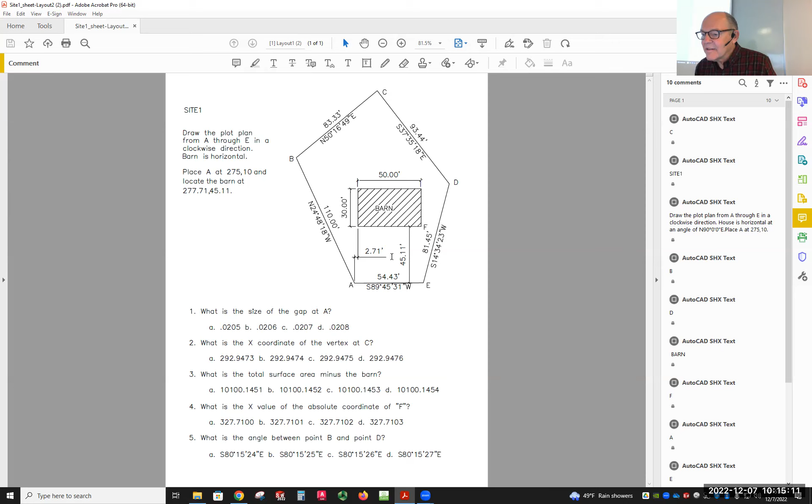One of the things you might not have realized looking at this, the barn right here, it's got a dimension from this edge. That means that that right there has to line up with this. So it's not horizontal. That makes sense?

So the way you would place that in there, what I would do is take that piece of the property line, offset it 45.11. That'll give you the bottom edge of the barn. Then starting at A, you're going to go over 2.71, and make sure you start at the beginning at A and not at the end of the whole thing, because there is a little gap there, right?

So if you start there and just go over, and in fact, you could draw a line from the end of that property line up and then offset at 2.71. That'll give you that corner right there. And now everything else has to be done.

Let me quickly do that one as a review, and then I'll show you how I would set that up for the barn. Okay, so let's start AutoCAD.

Right. Oh, I see, I see. You're talking about right here. Got it.

It doesn't, huh? Let me just see something here. Oh, it is off 10. That's a mistake. Boy, am I glad you found that. That's a 10. That's what was plus that. And that's up 10, yeah.

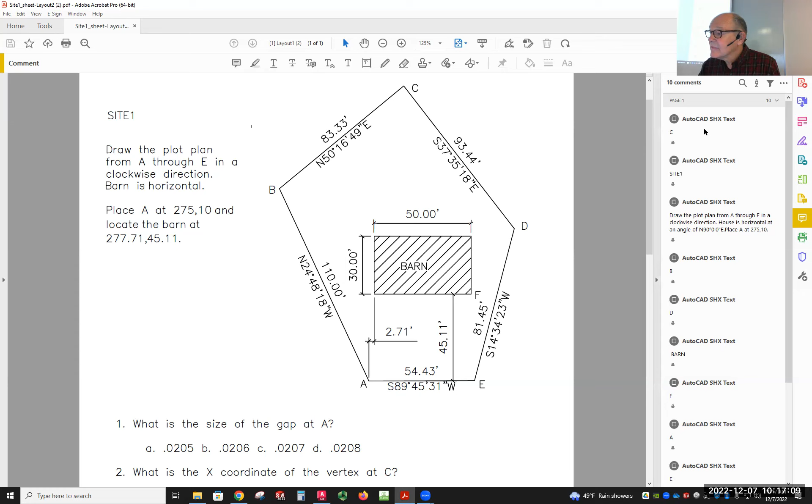You know what? I see what you're saying. And that is because there's an error here. That should be a 5, right? So anybody else doing this, Sarah just found an error here. If you take a look at this, that's 45.11 going up here, right? So it tells you to start it at 55.11 now, which is because that corner right there originally was at 10. All right.

What I actually would like to do on this one is really just get rid of that altogether, and then you just use the dimensions themselves to place it. So, but given that I said that, let me go on and do it that way. So what we're going to do here, I'm going to modify this, and I'll change that right now on the assignment.

And Jansen, would you close the door for me? Make sure that that's unlocked. If it isn't, I'll go and unlock it. I just find it a little distracting. Is it on the outside? Can you open it? Don't close it first. Hang on, folks. Actually, what I was expecting you to do was this, not lock yourself out. But we got you back in. I just want to make sure other people can come in. Here we go. Now people can get in, but I won't be as distracted.

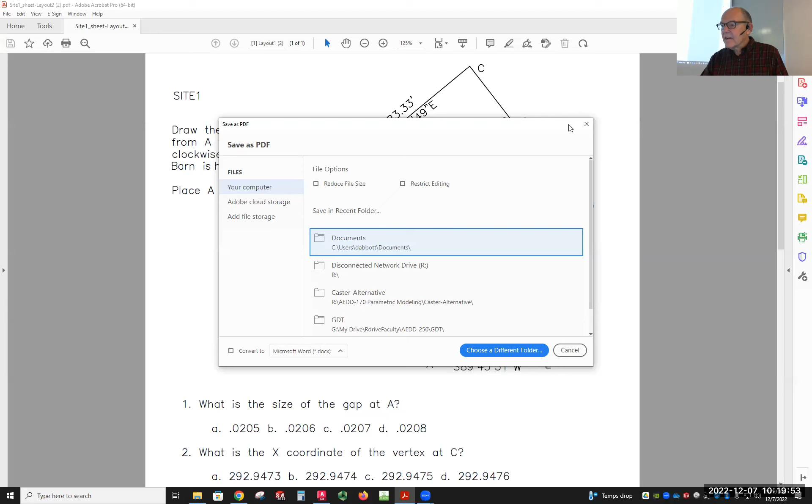All right, let me show you what I was talking about with this. And then we'll go through, if there are any other questions, I'll answer those, and then we'll go through the final exam. So I have AutoCAD here.

I'm going to start a new drawing, and this one's going to be acad.dwt. Come back out here, bring that over to there.

All right, so the first thing I'm going to do is to change my units. I'm going to change the units in AutoCAD so that they're going to be decimal, and I'll leave the precision set the way it is, but I need surveyor's units over here, and I want to set the precision to degrees, minutes, and seconds. So we do that.

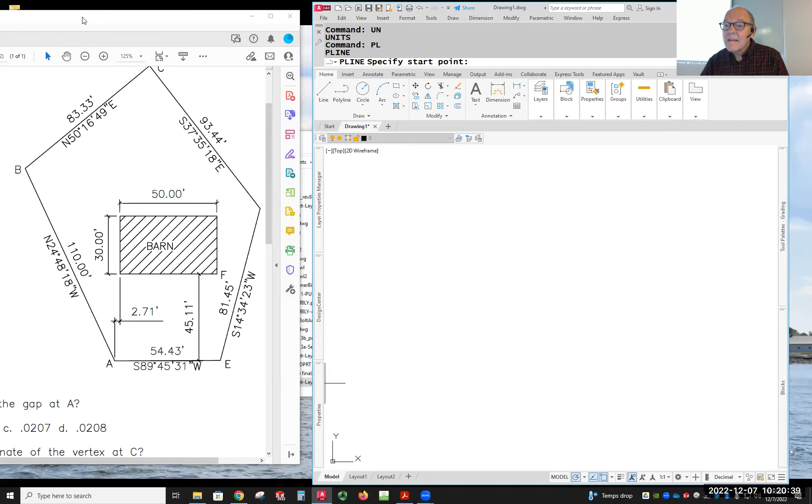Now I'll do my polyline, and it tells you to start that at 275 and 10. So when it asks for the starting point, I'm going to type in 275 and 10 like that. Zoom back out a little bit so I can see, because that's quite a ways away now.

I've got to zoom out before I start. All right, polyline, start point 275, 10. Here we go.

All right, so now if I look at the property line, I'm going to do this with relative coordinates, so the @ symbol, and then 110 at an angle of north, 24 degrees, 48 minutes, 18 seconds west.

Oh, I had a typing error here. I put the apostrophe instead, so I need to do it again. It's a good idea to take a look at what you just typed before you go on. So at north, 24 degrees, 48 minutes, and then 18, and 18 has to be seconds, so you need the quotation mark on that, and then W. Then it draws my line at the angle that I want.

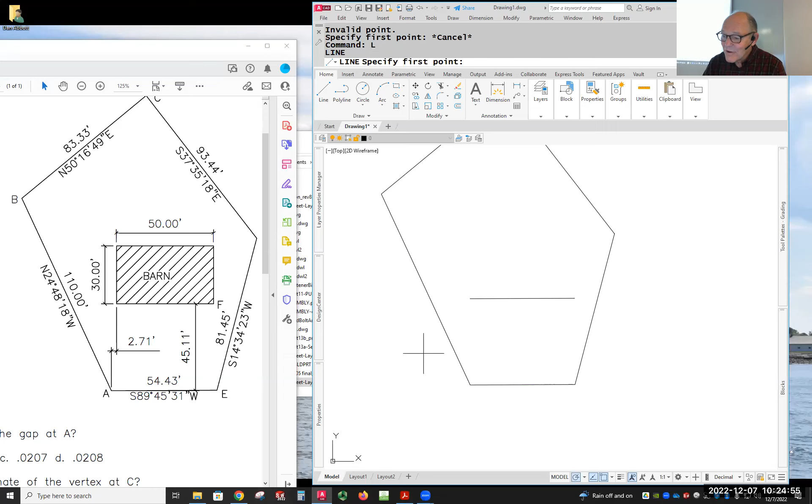Make sense? Now, before I said, if I draw a line from the end point of this - let me point something out here. I'm going to draw a line from the end point of that line. People tend to go right on the end point, but you notice there are two end points within that square, and I don't know which one I'm getting right now. So when you're drawing, if you want to be accurate, go to the endpoint by going to one side or the other of the midpoint of a line, because right now I have a running object snap for midpoint. If I'm closer to the midpoint than the endpoint, that's the one it finds. When I come down here, that's the endpoint - I don't have to be on it, I can see it's the endpoint because it's got that little square. So now I'm drawing from the end.

If I go straight up on this, now from there, I'm going to offset 2.71, and that's just going to give me the corner right there of the barn. So now I'll get rid of that. I'm going to use the fillet command to make a square corner here, so there's the corner right here.

Now everything else I'm going to do, I'm going to offset 30, make that go 30 up like this. Now that gives me the top of the barn and the side of the barn. I know that's the beginning of the barn right there. I'm going to draw a line that goes from here to here. Now the reason I'm doing this is I want to make sure that the angle between those two right there is 90 degrees. But because the line that I started with was not perfectly straight, it wasn't exactly 90 - that means it's not going to be exactly 90 if I use that original line. So by offsetting these two, I know those points line right up. When I connect the two endpoints, then that line is going to be 90 degrees to my starting line.

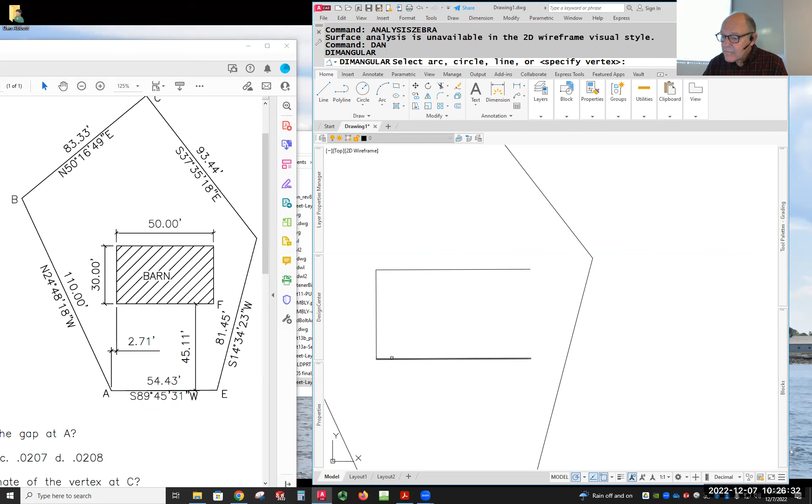And that's even if - when I put that angle on just to see what it looks like - even if I change the precision on that and put it up a little higher, right out to 8 decimal places, it's still 90 degrees. Now, I'm going to offset 50.

Oh, I put the foot mark in. Offset 50, and now all I have to do is clean the ends up here, and I can do that by trimming, or I can do that with a fillet command, as long as the radius is set to 0, and that's what it's set for by default. That's how I clean up corners all the time when I'm drawing using the fillet command. So when you're doing your job and you need a clean corner, that's the safest way to do it.

Because it'll extend lines or trim them automatically for you. Now, before that, if the last fillet I did was set to something like 10, I can't use the fillet command to make a sharp corner because it wants to round it, unless I hold down the shift key. If I hold shift down while filleting, it'll give me a sharp corner because people do it so much. It's a really useful tool. So that's how I would place that barn in there. That makes sense, Sarah? Okay.

And then you go ahead and answer the questions from there. Anything else on the auxiliary views or the site plan? Anybody in here? Anybody at home? Sarah?

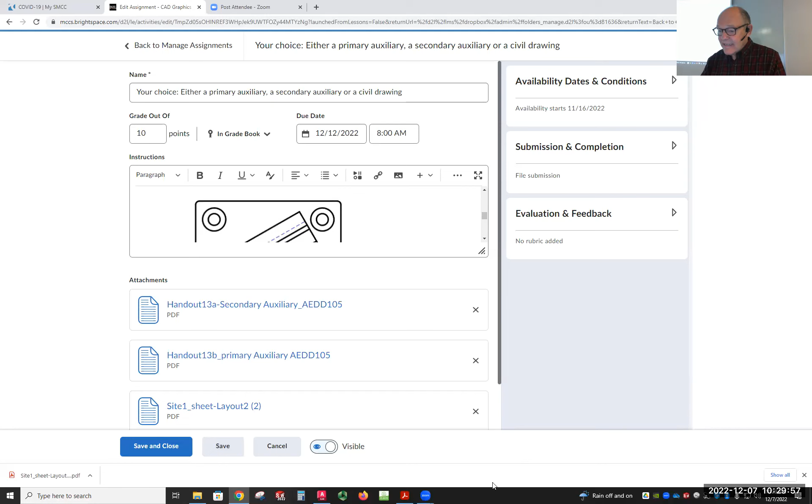But all right, let's go back and take a look then at the final exam. It's the final exam review sheet, I should say.

Oh, I know what I'm going to do. I'm going to open up the Microsoft Word version of this instead of the other one, so I can type inside it as we go through if you have any questions about it.

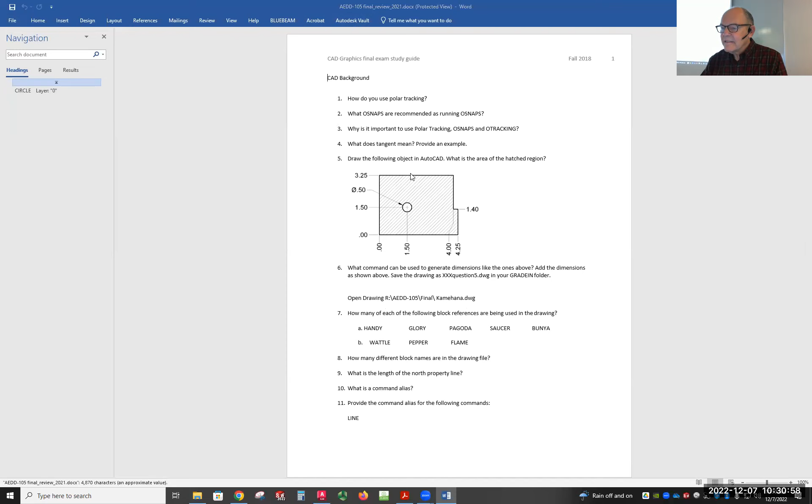By the way, if I give you something in the document file format, the DOC or the DOCX, that's a Microsoft Word file, but you can go to the window at the bottom and open something called WordPad, and WordPad will open a doc file. So I could have gone here and opened this. I'm going to just check and make sure that's still true.

So we're going to call it a DOC file right there. I'm using it already in something else. That's why it won't open, but it looks like it would. Let me just make sure. I want to make sure before I tell you that it will, that it does. So let me open it there.

Yeah, so you can see that's exactly the same file. So you don't need to own Microsoft Word. You don't have to have it installed on your computer. If you've got Windows, WordPad is an application that comes with Windows. And it doesn't support everything, so it's quite possible.

Yeah, you see, it does mess up a little bit here. You might have to go back and say, well, circle. Okay, that's what it's saying. Arc. Those are the commands. So WordPad will open it, but that doesn't mean it'll open it entirely accurately.

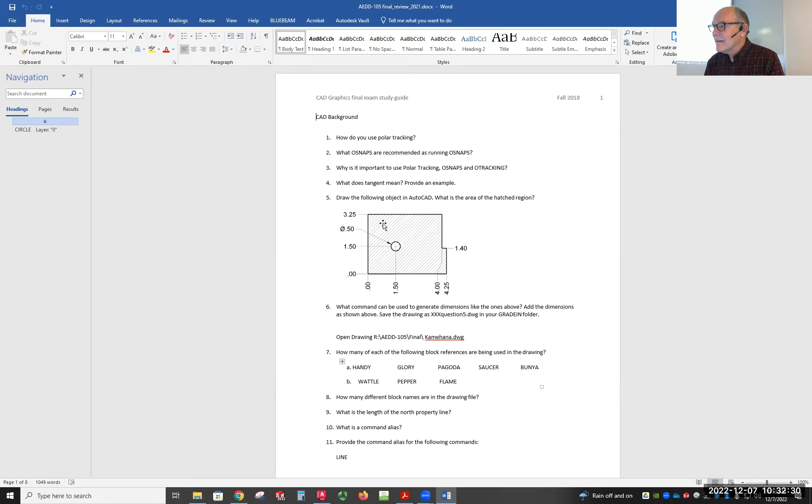So let's open this up with Word. But you have it in two forms. You got a PDF file and you also have a doc file. If you want with a PDF file, you can print it out and handwrite it, or if you have a way of typing into a PDF file, you can do it that way, or you can open up the other one. So the question you had was about the last drawing.

Was that this one right here? Okay, and what is your question?

Here's the thing about an auxiliary view. If you take a look at this part, and I show you what it looks like, this has an angled surface. There's a hole that is 90 degrees to that surface, meaning it goes straight down through at 90 degrees. The only place to show that hole in true shape is if you were looking straight down at the surface, right? So on this particular assignment...

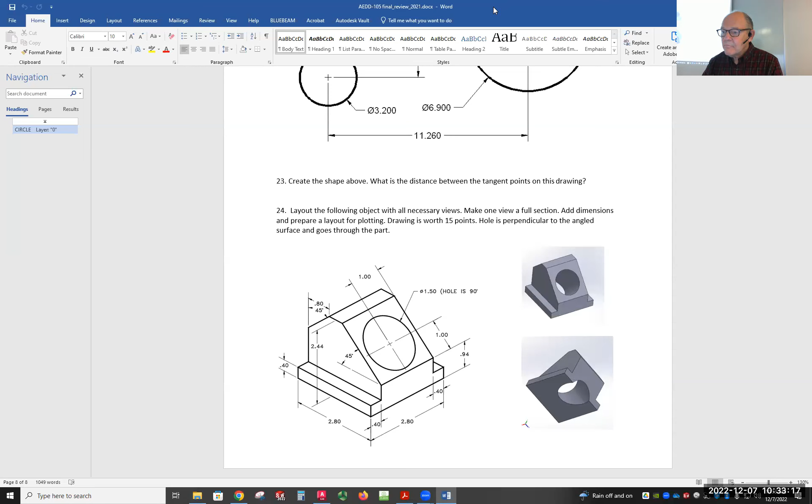All you've got to do is set this up. And really the offset command is your best friend when it comes to auxiliary views. No matter what the auxiliary view is, chances are really good you're going to be able to generate what you need using the offset command.

I'm going to start a new drawing. This drawing is in inches, so we'll do that. If I draw the front view, I just come over 2.8, and I would come up the height of this, which is 0.94. And then I'm going to have an angle, and the angle is 45 degrees. So I could go down and set my polar tracking so that it only goes 90 or 45. So there's my 45-degree angle.

I don't know what the actual length is, so I'm just going to draw it longer than it needs to be. Doesn't even matter. You can draw it shorter than it needs to be or longer, because the fillet command will clean it up for you when you're all done.

Now I'm going to go back to the beginning. I'm going to go straight up on that. If I go straight up on that, it goes up 2.4... 2.44. Now I'm going to come over.

So if I come over here like that, that's that corner right there. Make sense? Now, if I take a look at this, I also know that 0.8 over from there. So I'm going to hover over this, go to the left, go to the right and type in 0.8. From here, I go down at 45 degrees and I get that. So then I'm going to trim this all up.

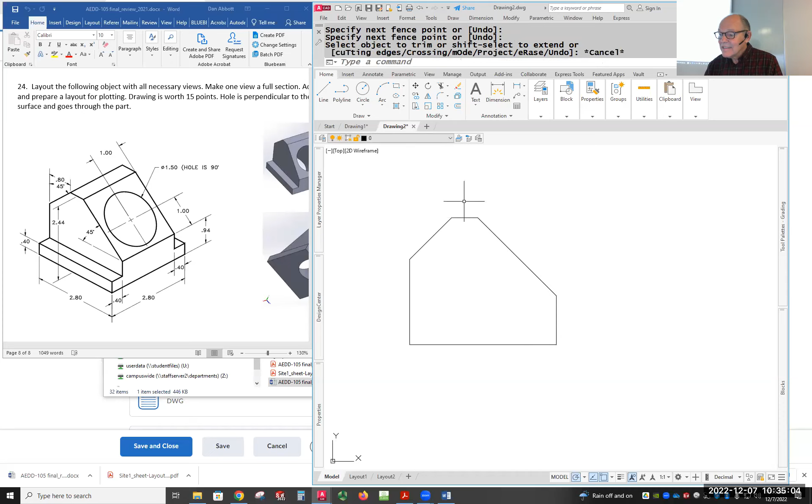Now it's that 45-degree angle that causes the necessity for an auxiliary view. So if I offset, I'm just going to offset this so that there's 2 inches in between. If I bring that up here like that, and then offset once again the width of this, and the width of this is 2. Bring that up like that. That is what it looks like if I'm up here looking straight down at that surface, 90 degrees to that surface. Make sense? Now I just have to go in and clean this up like this.

Now, where is that hole? That hole is centered. It's 1 inch above. So I'm going to offset 1 and bring that up. It's 1 inch above the bottom and happens to also be 1 inch over from here. So the center of the circle is going to go right there. The diameter is 1.5. That's my auxiliary view on that particular part.

Okay, if it has an arm coming down, so whatever you have for an angle, draw the line representing the angle and then offset it. That's a primary auxiliary view. There's no secondary on this one. You're going to have a different thing to draw, but I'm not going to give you a secondary auxiliary view. It would be a primary auxiliary view. All right, make sense? Everybody else make sense?

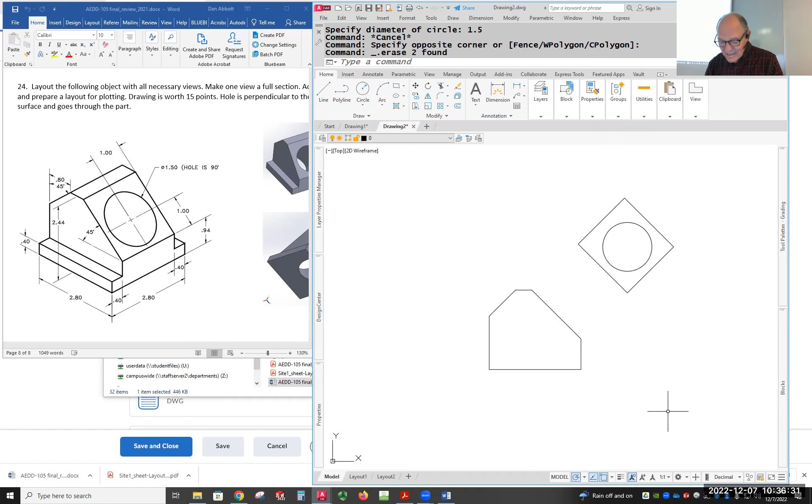This is really no different than doing a right side view or a left side view. You're still projecting, but normally if you're doing a right side view...

Hang on, I'm just going to put an arrow pointing at this. So the width of 0 to start off with, and the width to end would be like right here. Hang on just a minute. Width, starting with 0, ending with some other number other than 0. So there's my arrow.

So if you're looking from that point of view, which is how a right side view is set up, that's 90 degrees to that surface right there. So it's exactly the same thing, except that it's not a surface that is already orthographically in one of the 6 principal planes. Okay, make sense, folks? Yes? Ru, Thalia, make sense?

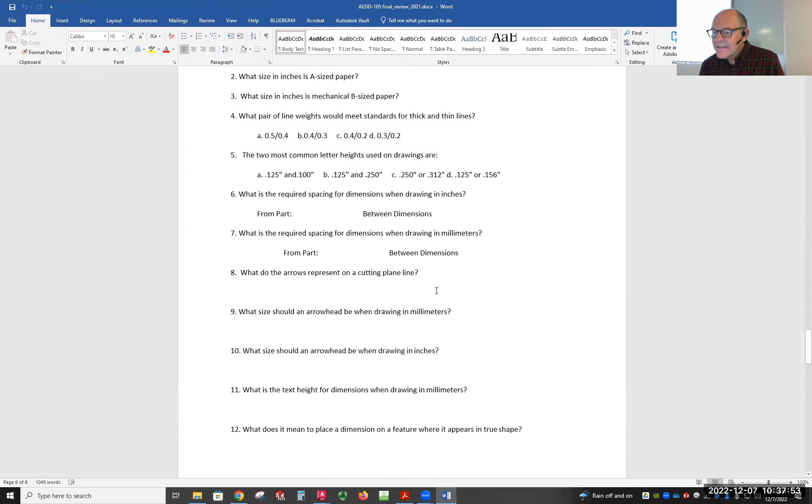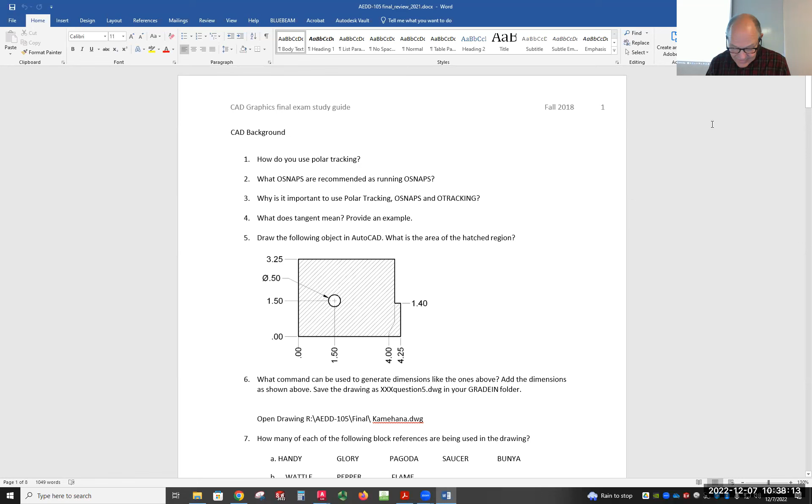Getting no response, I'll assume it makes sense. Now let's go back to the exam. Ernest had a question about the M-line command. Let me find it with Control-F, searching M-line. There it is, question 34: if you use the M-line to draw a floor plan, what setting controls the distance between the M-lines?

There may be questions on this exam about commands I've never covered. I think that's perfectly legitimate. Your job is to say, I don't know, and try it out. Any question that asks about something you're not sure of, whether you've been exposed to it or not, try it, take a look, see what it does. Don't just assume you know the answer. But since Ernest asked, let's talk about the M-line command.

I'm going to start a new file using ACAD, and let's say I wanted to do a floor plan. I'll go to units and set them to architectural, and make the limits big enough for a house, 40 feet by 30 feet. Now I want to draw something like a foundation, so I'm going to go to the M-line command.

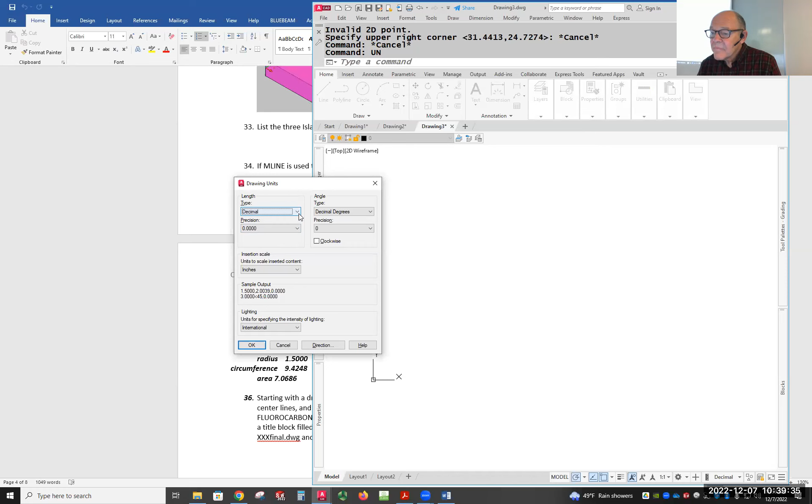Invalid point - oh, I picked architecture but never picked OK. I got a little ahead of myself. Now I'm changing my limits just so they're bigger than they start off being. I'll go to 40 feet and 30 feet, then do a zoom all.

Now I'm going to use the M-line command, starting at some random place. As I draw, I'm getting 2 lines. If you look at the options, I've got style, scale, justification - those are my 3 options. Justification is currently set to top, meaning as I draw, the top line is where I'm selecting my points. If I change justification to 0, I'm going in the middle between the 2 lines. If I go back and say bottom, now I'm using the bottom as my insertion point.

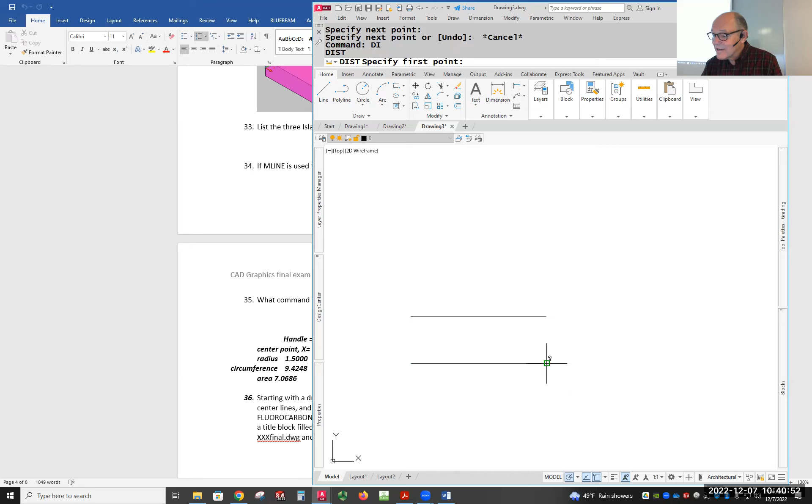Now if I go in here and say scale - this is how I would check this out if I were you - if I change that to 2, now it's twice as wide. If I put it in there and do a distance measurement from here to here, the distance is 2 inches. So by default, 1 means 1 unit.

Now let's go back and see the next one, and that's style. If I pick style, it says you don't have any choices, because if you take the question mark - whenever you get a command with a question mark, it gives you a list of possible answers - if I do that, there's only one style called standard. That should tell you that like dimension styles or text styles or table styles, there's something called an M-line style, but I don't have any idea how to do that.

I'm just going to start typing M-line and see if M-line style comes up. Doesn't seem to come up. How about M style? That doesn't seem to come up either. So where is the M-line style command? How do I change it? I don't know. What are you going to do? You know what you're going to do.

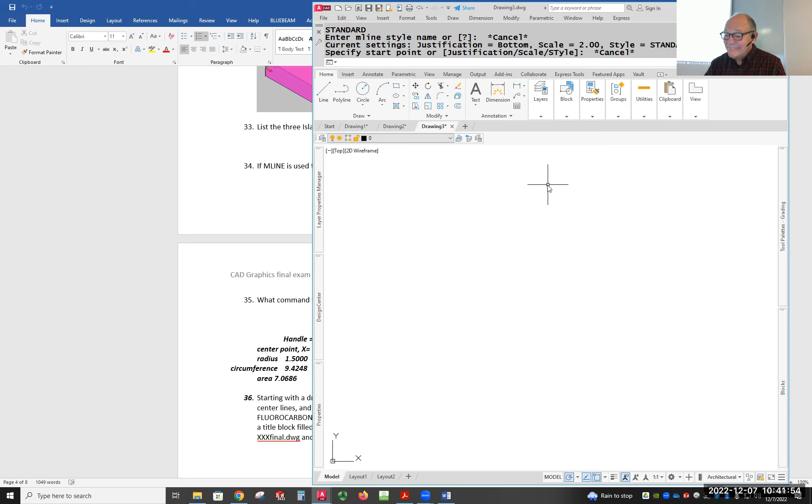You're going to Google it. You'll go out and search something like M-line style AutoCAD. And it comes up - search for M-line style, to create an M-line style, right there you pick it, and it says at the command prompt enter ML style. This all making sense? This is just a strategy for dealing with stuff that's new. On the job, when something comes up that you don't know, don't run and ask somebody immediately - try to figure it out.

Autodesk is the name of the company that produces or manufactures AutoCAD. The original company produced one product, AutoCAD. Now they produce hundreds of products. Revit is an Autodesk product, and so is Navisworks, which I'm going to be using on Friday. I'm doing some training at Bath Iron Works on Friday morning, and that's one of the things I'm going to show them. They have a program called Recap, where you take photographs, upload them, and it supposedly makes a 3D model.

Autodesk has a Civil 3D program, and they've got mechanical design software too. So they have dozens of different software programs. When you went and signed up to download AutoCAD, you went to the Autodesk website. When you get there, it shows you the various pieces of software that Autodesk sells, and that's what they are right there. As a student, you can download any of those.

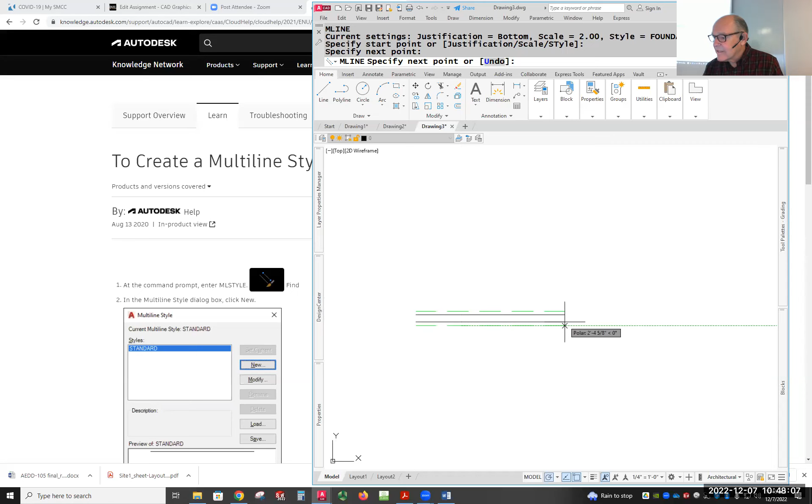Now, if we take a look at this, right now it's set up so it runs along the bottom. When I go to M-line, I'm going to say I want the scale to be 10 — a 10-inch foundation wall. And the justification — unfortunately you only have 3 choices: top, bottom, or 0 — so I'm going to go to bottom. That'll give me the outside of the foundation wall. So you see, I can go like this, let's go 40 feet. Zoom out and go up.

And you see what it's doing is making all the corners for me. And then I could go up 30 feet, and go over here another 40 feet, and then I could close it up. So it gives me a way of drawing and having all the corners cleaned up at the same time.

This might actually be very useful to you in that job you're about to do. I don't use it very often — to me, it's easy to just draw a rectangle, put it on the right layer and do it that way. But that's how the M-line command works.

Don't be hesitant to just try something and then look it over. The only thing you might run into is, I don't know how to change the style. You type something that makes sense, like M-line style — it doesn't work. You go and do a search online, a Google search. There's also a help system here, and that used to be very helpful, but the Google search is a lot quicker than going to the help system.

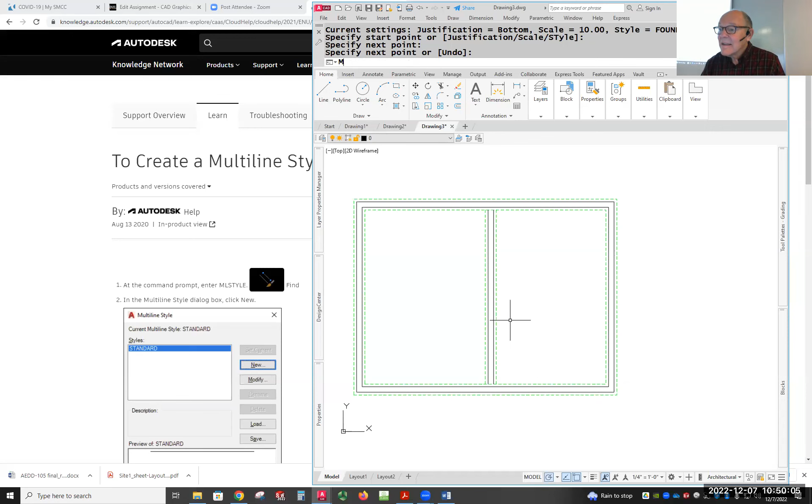The other thing is M-line has some other things going on as well, where you can say I want to snap to here and go here. And then you go to ML edit. ML edit allows you to say I want this to be an open T between here and here, and when you do that, it does a break like that — see what it just did? Now I can do an open T, then pick this one and this one. Now, what it should have done is taken and done a break right there, but it doesn't — it just does the outside.

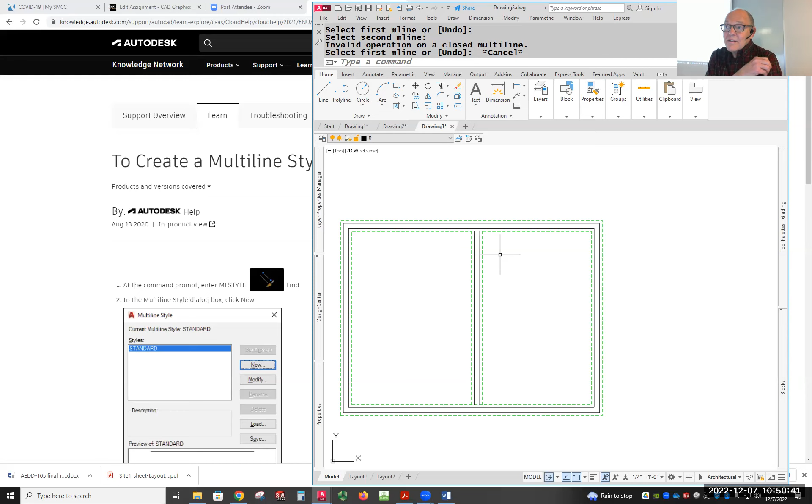These are when I'm saying there's limitations to this. To me, this has never been all that useful a command because normally I can do something else. But here's one place where it would be useful: suppose you had a wiring diagram, like 16 wires that all had to go together, and that sometimes happens when you're doing the kind of stuff you're doing. If I had an M-line style and made a new style, I'm just going to call this 16, continue. Now let me start with standard.

If I say I want to add another line, and I want that one to be offset 1, then add another line offset 1.5, add another offset 2, add another offset 2.5, do another one offset 3. Now I go in the other direction, add another one and offset that one -1.

I think you see where I'm headed with this — that's why I don't need to do all 16. But now the beauty of this is a lot of times you have these wiring diagrams. You can still see it up there — I can't see it here. Something changed. I'm going to have to look at the overhead on this one now. This is a black screen to me. All kinds of problems today.

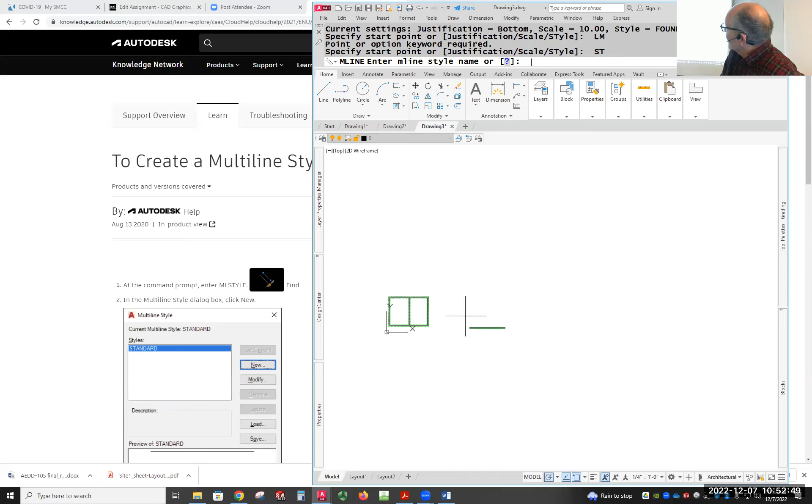If I go into the M-line command now and I look for style, which is ST... Actually, can you still see when I'm sharing my screen? Can you still see it? Yes? No?

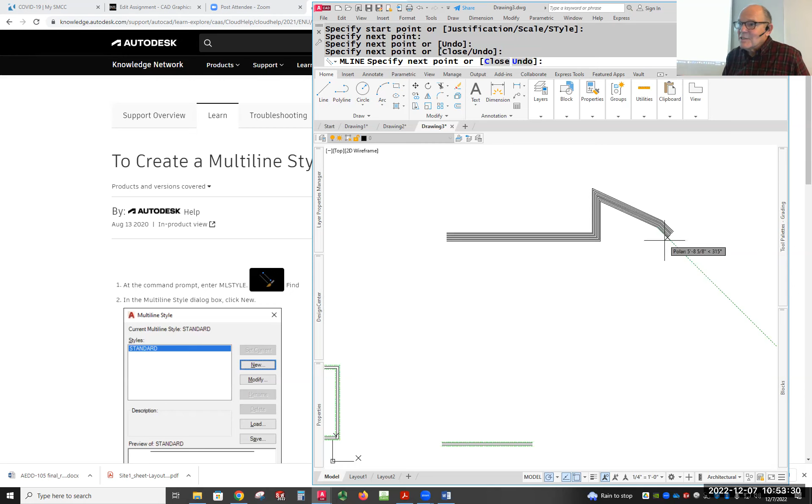Okay, the style I made is called 16. So now as I start drawing, as you can probably imagine, I'm getting as many lines as I created here. But you see what it does — it does all the trimming for me and cleans up the corners, no matter what they are. So there are situations where you have multiple parallel lines you need to draw and you know the spacing between them — this actually can become a useful command then.

Came back. All right, and this now becomes a useful command.

You can explode it and it becomes individual lines. So when you need a bunch of lines like this, rather than draw one line and go through the process of fixing it, it's sometimes a lot quicker to do this.

I will say though, if you draw with a polyline and draw the whole path, whatever it is you want to draw, the offset command allows you to offset that whole polyline. So you could create your own by doing that with a specific offset. That would be something similar.

And up here, once you explode that and it becomes a bunch of little individual lines, you can join them all together.

Ernest, you're joining my Zoom session, right?

So that's as much as I think you need to know about an M line, but that's how I would go about it. As far as a strategy, folks, don't underestimate what you know. You know a lot already. Otherwise, Barth wouldn't be getting a job, right?

All right, let's go back and look at the rest of it. Is there anything else on the final exam review, folks, that anybody has a question about?

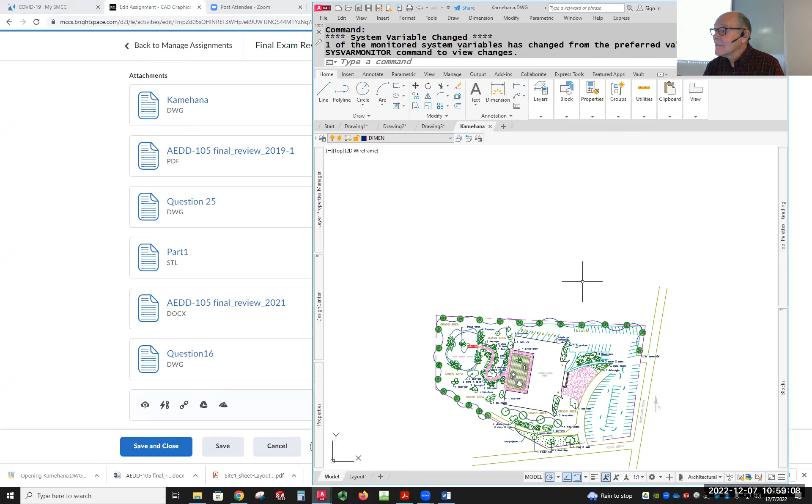Okay, that's this drawing right here. So I'll download it and open it up, and it looks like this. This drawing is a landscape drawing, and the landscape drawing has a piece of property. There's a property line right there going all the way around.

It's got a lot of blocks, because if I go and hover over any of these, you can see every one of these things is a block, because it has that little thing in the middle, and the whole thing can be moved. Also, if I hover over something and wait, it pops up and tells me it's a block reference, and it even tells me the name of it. So I could try to pick each one and figure it out, but that wouldn't make much sense because it would take forever and you'd miss something.

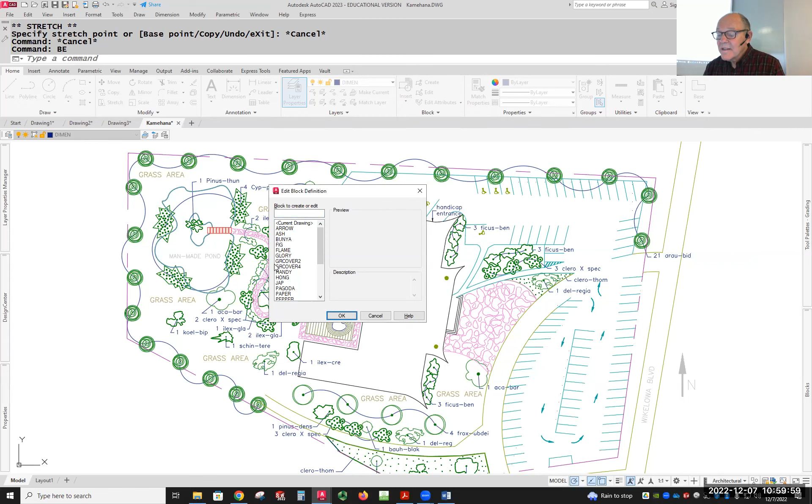If I go into the block edit command, it's a list of every block in the drawing. Doesn't tell me how many have been inserted though, does it? So there are a couple ways to do that. One is to say, well, what is the specific block name they want to know? So how many handy blocks are there?

If I go back to the drawing and go into properties, up here in the upper right-hand corner there's something called quick select. I go in here and say I want to select from the entire drawing all of the block references whose name equals handy. Go back to properties. There are 11 of them. Make sense? Let me do it again.

I go back over here and say I want a new selection set, block references whose name equals arrow. Pick OK, go back over here, and none of them have been inserted, 0.

Go back over here, try another one from the entire drawing. It says object type, go here to block reference, then down here based on the name. So if I pick something else, like bunya, probably has some. Pick OK, and by the way it lights them up too, but you don't have to count them. Just go back over to properties. It's going to tell you it picked 21 of them.

Make sense? There is also, and this is kind of a secret, a command called bcount. Bcount says press enter to select all. I press all right now, and then press F2 to see. It's going to give me a listing of every block in the drawing and how many of them were inserted.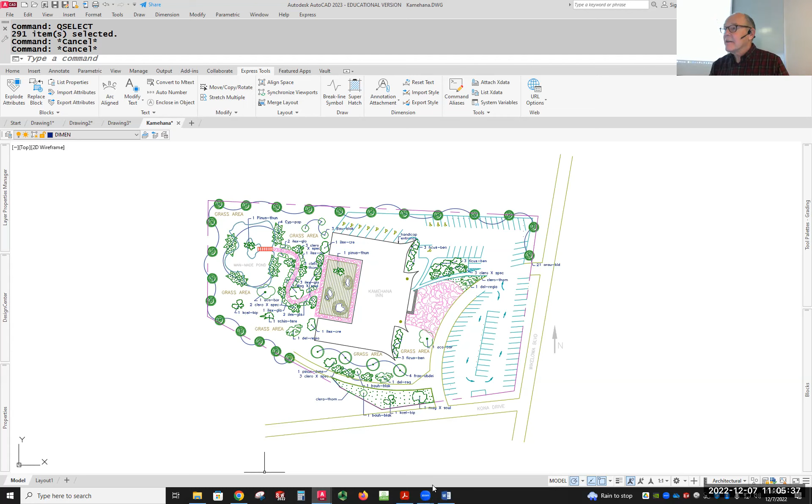And I'm going to see if I can communicate. Thalia and Rue, are you able to hear me and see me and everything is working out, or am I frozen here? Yes, everything's working well. Was the screen sharing frozen to you at some point? Yeah, but I think it was just the connection. I had Ernest in the class signed in as well, but he's in the classroom and he told me, listen, I can't see what's going on because it's frozen on my computer. So that's when I got out and got back in again. I don't know when that kind of thing happens when I'm working here, it just looks fine to me. So if something doesn't seem right, don't hesitate to interrupt me and say, I can't see what you're doing, or your screen is not moving, it's frozen, I can't tell what you're doing.

Make sense? Yes. And Thalia, I can understand why you are muted, apparently you have a little person with you who is requiring some attention. That I appreciate. Okay, we'll see you in a few minutes.

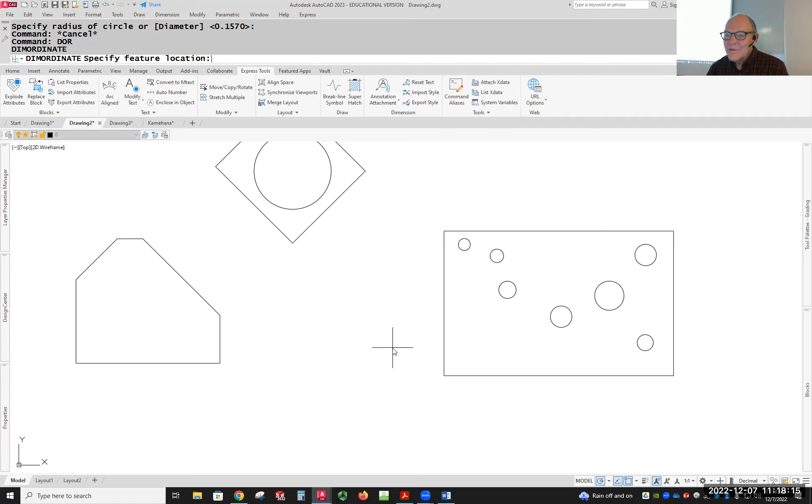It's very common to do something called ordinate dimensioning. Ordinate dimensioning can be placed with the dim ordinate command. When you do the dim ordinate command, you pick something and it's always based on 0,0 - that's how far away it is from 0,0. So it works only if you then change the coordinate system, the origin of the coordinate system, and make the origin there.

Now, if I say I want a dim ordinate, pick here and pull it out, now that's 0. Once that's 0, then I bring this out and that tells me how far in the y-axis that hole is from the base point. So ordinate dimensions are dimensions done from a datum point - every one of those numbers indicates how far away from 0 it is. So that would be the vertical, the horizontal dimensions, like so.

So you could do it like that and then go through, and those are called ordinate dimensions.

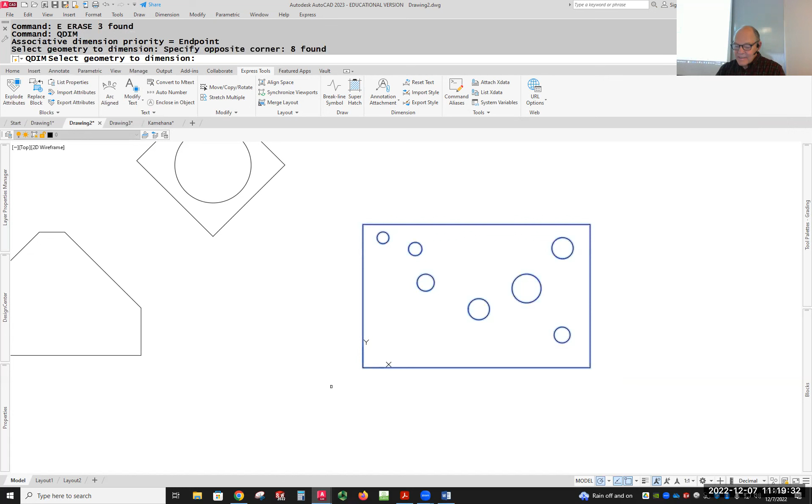Make sense? However, I'm going to show you a very nice tool because there is a command called QDim, which stands for quick dimension. QDim allows me to say I want a dimension of all of those things, I want the dimensioning to be ordinate, and I want my datum point to be right here. Now I do that.

Make sense? Ordinate dimensioning, and you can see what it is. Now when you have a situation like this where one of them seems to be on top of the other, you just pick it, drag it down, and you get something called the dog leg. This is a really nice way to put in dimensions, and again, it's called ordinate dimensioning.

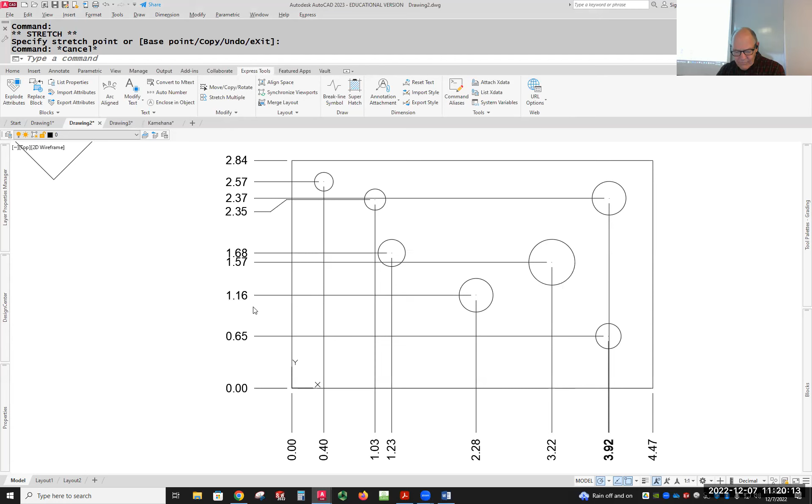So if you have a question on the exam that asks you to identify what kind of dimensions those are, they're the ordinate dimensions. The word ordinate is the root word of coordinate, and it means the coordinates X and Y, and Z can be added as well.

So the X coordinate is across the bottom and the Y coordinate is up and down, vertical. Make sense? And if you're asked to open something and put the dimensions on, QDim is a really cool way to do it. Let me point out, I go back to the QDim command now. Whenever you do something like this, if you do QDim and pick all of these and bring it over here, you notice that's not 0 right now because 0, 0 is over here. So if I were using my regular coordinate system before placing them, you have to do this: QDim, you pick your geometry.

Up here, you pick the type of dimensioning you want. You could pick continuous, for instance. If you pick continuous, it's going to line them right up like that. You could also take those dimensions and change them to ordinate, so now they look like that. So continuous is one, ordinate's another, and the other possibility is to do baseline. And to do baseline, that looks like that. Make sense? You see how quick that is.

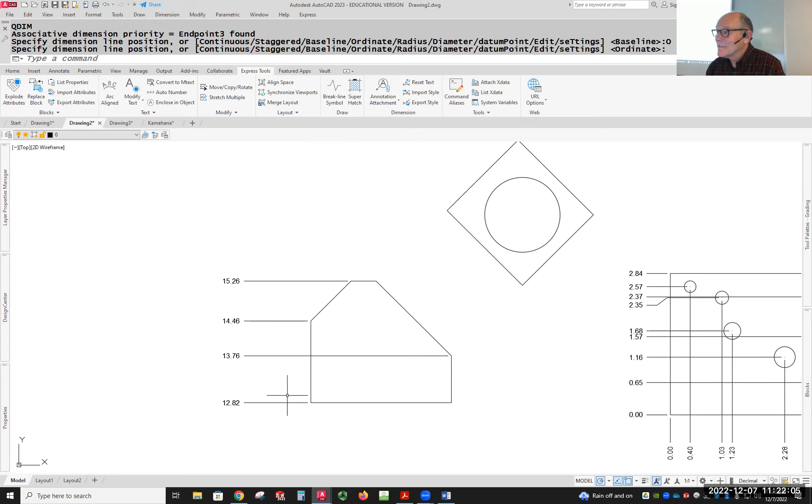Now the problem with ordinate, though, is that right now it's not starting at 0, 0. It's starting at how far it is away from the origin of the drawing. So when you do something like this, you've got to start with QDim by getting your geometry. And once you've got the geometry, you have to pick the datum point and say, there's where 0 is going to be. Now it's going to establish the datum as 0 in that corner that I picked, and everything else is going to come off of that.

Press enter, P for previous, come down here. Now 0 is the starting point, and those dimensions are the distance away from the starting point. Make sense?

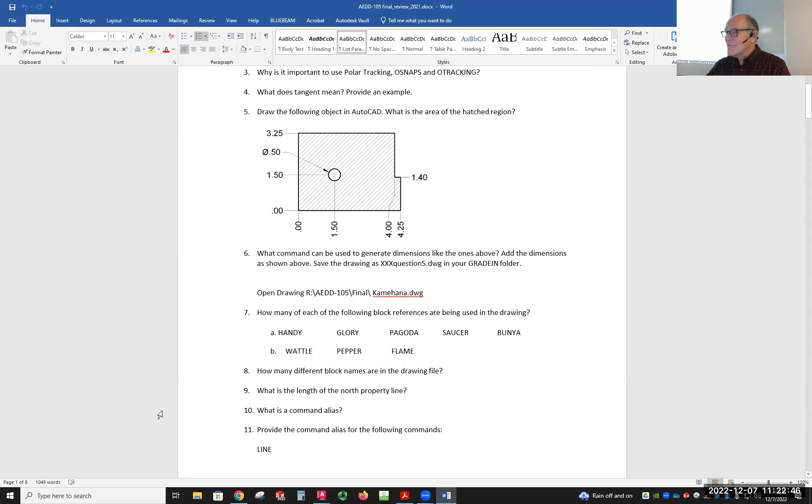This is the purpose of a final exam, by the way, to kind of review things, little new information, and to some extent see what you've already done. So we've talked about this. How many different block names? What's the length of the property line? You all know how to get distances.

So the property line in this case is that line right there. There's so many ways to do this. One is you pick it, you go to properties, and under properties it tells you the length right there. The other thing you can do is pick something, right click and go to quick properties, and quick properties list a number of things, including the length, right?

The other thing you can do is the dist command, and the dist command between that point and this point is going to tell you the same thing, but you have to be careful because it gives you distances in 3 different ways: the direct distance between the 2 points, then the distance in the X, and the distance in the Y. So the distance in the X and the Y is like, what's the distance straight across here? I'm trying to do this without getting a hold of the wrong thing. Yeah, there's the X, there's the Y.

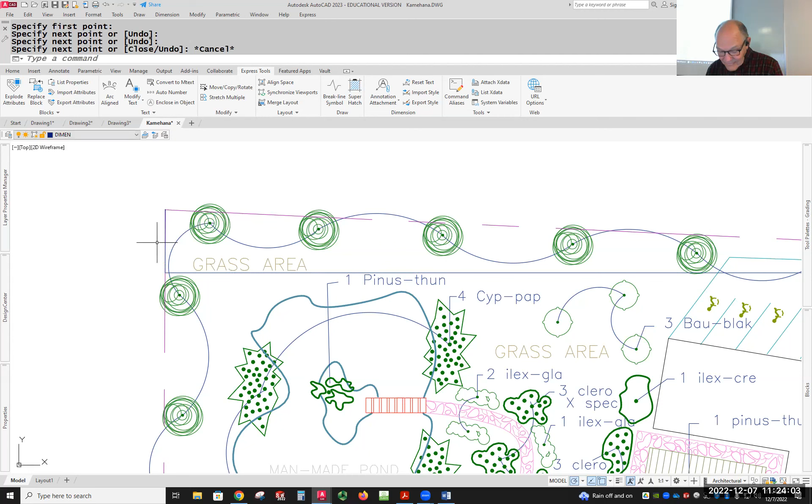So the distance in the XY, that's the X delta distance, and that's the Y delta distance. In other words, how far does it move in the X direction and how far does it move in the Y direction? And when you use the dist command, just be careful.

Just be careful that you don't read the wrong number here. Delta X means change in. The word delta means change. If you ever took a science class, that little triangle is a delta symbol. So a lot of times in chemistry, delta T means change in temperature, delta S means change in speed.

So the direct distance is given here, and then the angle here is given. And right now, because this is set up with surveyor's units, the angle is north 87 degrees, 16 minutes, 19 seconds west. So it's almost 90, or close to 90, but it's off by almost 3 degrees. Making sense? Go through the rest of this, I think this is helpful.

Say what? Yes, it is, if there's no north arrow. Yeah, there's a north arrow right there. The north side of this would be that line right there. In other words, if you take a look at this, north, based on you, north, east, west, and south. So if you looked at that, you'd be a little hard pressed to identify that long angled line as north, south, east, or west, because it doesn't really line up with any of them. But if you ask me for the north border, I would consider it the one closest to being horizontal. That would be the east, that would be the west, and the top one would be the north. Okay.

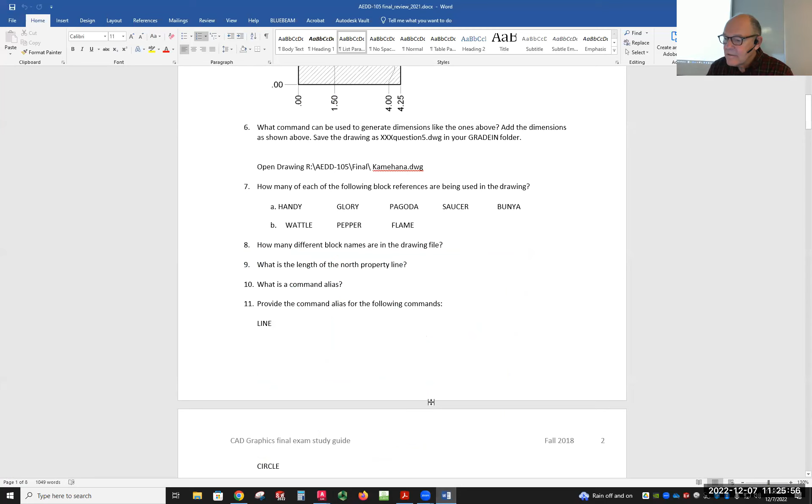You know what an alias is, correct? And I'm giving you a bunch of things saying, what are the alias? Now, here's the thing. What if you don't know what the alias is for one of those? Then you have to Google it, or just try it out, right? Here's the thing in AutoCAD that I hope you've learned. If I say, well, what is the alias for area? Type the letter A and see what comes up. I don't see area there. Well, AR maybe area, so then type AR and see what comes up. Oh look, there's area, right? You pick it, area comes up like that.

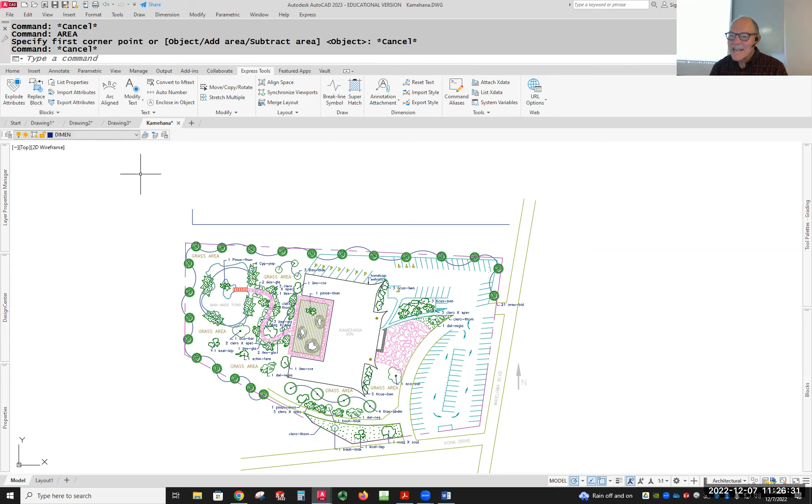Now, is there an alias for area? Try some things - AA is the alias for area. Okay, now you try something, you can't figure it out, you Google it. What's the alias? You just go to Google. What is the alias for area? And you're going to do this on your own. The other thing you can use is anything that you've already done for this class. And even if we did that in class, that's exactly what I would tell you. You have access to all the work you've done in class.

So if you're going, gee, he wants me to set this drawing up with layers - I've already set up layers. Oh, I think I'll use Design Center and I'll bring my layers in. That's what I love seeing students do, because then you're working the way you'd work in the field, and not just working like you're a student, right? So if I do ask, and I do, you have to do some drawings and set them up and do the layout and the page layout, the whole thing. If you say, well, I've already made a template, I could start with that, I have all this done - is that cheating? That's smart, right? That's not cheating at all, that's just being smart. Now if you made a template, good for you.

And by the way, let's suppose you had something like this. Suppose I asked you the area of that, which is the lawn around there. If you want to know the area of that, that's a closed polyline. If I have a closed polyline and pick it and go over to properties, area is one of the things it tells me. That's 18,626.16 square feet.

Now, could I also have put a hatch pattern in there? Yes, but sometimes you have to be careful that a hatch pattern covers what you expect it to cover. So if there are things inside that are islands, that might give you a different result than if you pick the outside boundary. Which is why, if I really wanted to know the area of that and I didn't want to mess around, I would copy

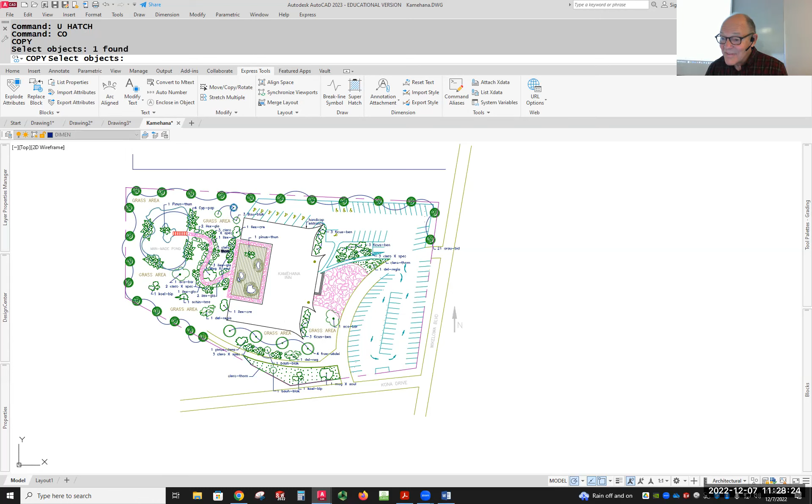all of the things involved here. Copy all those things, bring them over here, just temporarily. Because then if anything's in the way, I would just delete it. So if that stuff's in the way, just go ahead and delete whatever you don't want. So you come in here and delete that, you come in here and delete this. So if you think any of those things are going to bother you, this is a copy of it - you don't care what happens at the end of it. You're going to throw it away anyway. But you notice now I've got a nice clean version of this.

Now I can go and put a hatch pattern in there. And that's why I like to get the area - pick the hatch pattern, come over, the area is given right there, exactly the same area as the other one. Yes.

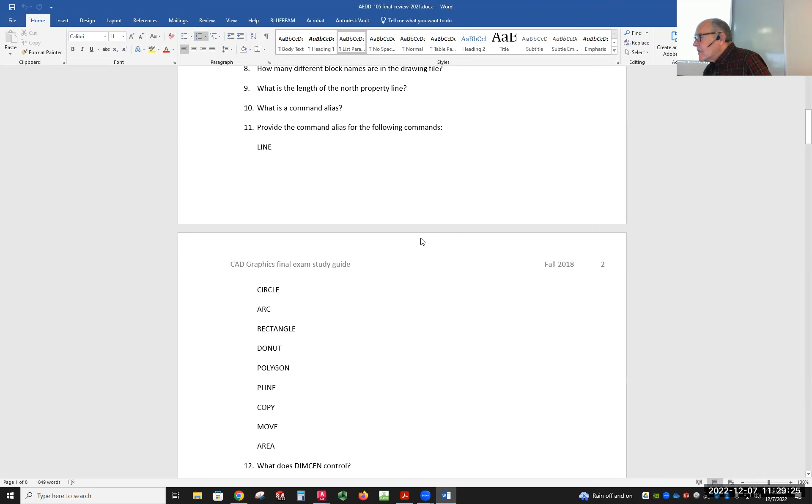What was the other one, the PDF? Yeah, I want both. Here's the reason I want both: I want to make sure you really do know how to plot. And here's the advantage to you: when you do it and go, wait a minute, my title block's not there, now you know you've got a problem you have to fix. So this is really to make sure that you can analyze what you've done, and whatever you give me is as close as possible to being correct. Right? See what I'm saying?

Because many times during the semester, people have submitted drawing files. When I go into a preview, the title block's not there because it got put on a non-plot layer, since the last layer you created was for your viewports. Your viewports are on a non-plot layer. Sometimes everything's on a non-plot layer - the viewport, the title block, all the text in there, all that stuff. You would know that immediately if you plotted it or did a preview.

So in the past, what I've said to people is always do a preview, and then it comes in and I give it back to them. I say, I can't see your title block. Now I just have them do both, because if you make the PDF file and you still submit it even though you can't see the title block, I'm going to say, why did you do that? You're not going to do that at work - 'well, I know you can't see what I just did, but that's just the way it is.' They don't like that at work. They want to make sure it's right.

Things like this, dim cen, dim center, just try typing them to see what they do if you don't remember. Dim cen is something I covered right at the very beginning, and you may well have forgotten a lot of things we've covered. In fact, I'd be shocked if you didn't forget a lot of things we've covered, right?

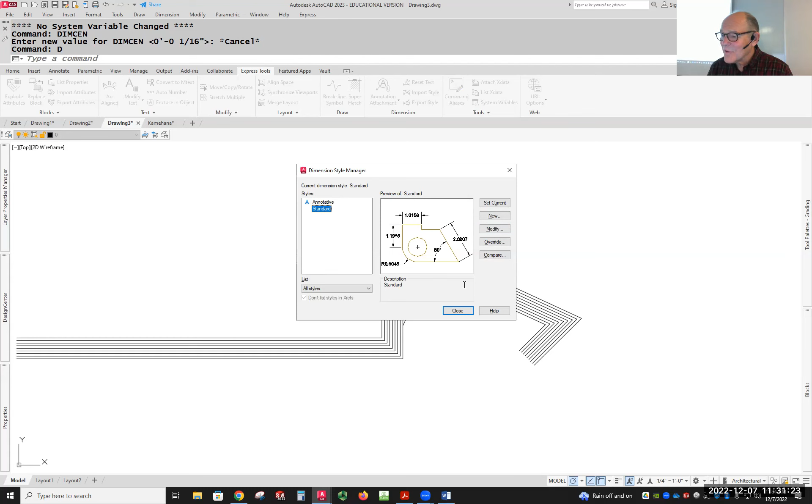So if you type dim cen, for instance, it comes up and says you need a new value. It doesn't tell you exactly what that does, but that is a variable, that's why it's a value. And the variables that have a 'dim' at the beginning all control the way your dimension style behaves. So at the very least, you could say, let me set dim cen equal to something like 1/8 of an inch. Now let's go in here and see what showed up now as 1/8 of an inch. Cen sounds like center mark, so you might say, let's go here and go, oh look, now that's 1/8 of an inch. What does it control? The size of your center mark.

Make sense? You also have, of course, Google. If I went to Google and said, what is dim cen in AutoCAD, it's going to come up and say dim cen is a system variable. What does it do? You pick that and it tells you it controls the size of your center mark.

So again, you've got access to all kinds of tools that, believe me, when I was doing drafting, I didn't have access to these things. I had to look in a book. I had to own the book, and it had to be with me when I did the drawing, or I had to remember everything that I had to do, right?

Really, there are times looking back when it wouldn't have occurred to me. It didn't occur to me in 1968 - boy, wouldn't it be nice if I could get on a computer and look stuff up? There were computers then, but they were millions of dollars. The idea we'd be carrying a computer around in our pockets never occurred to me back then. My first computer experience was in 1968 - I was programming a mainframe computer when I was in an engineering program. But never once did I go, well, this thing that is the size of a room, someday we'll walk around with it in our hands. I would have said, yeah right, and someday I'll flap my arms and fly. That would have been the same thing.

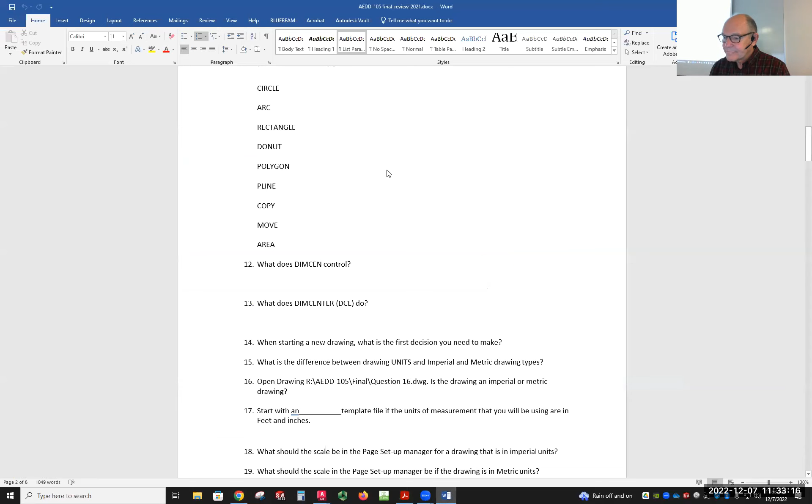This one right here, you should all just immediately tell me. This is one of those things where people still mess up a little bit. I'm going to go over something right now to show you what to do when you do it wrong. But what's the first thing you do when you're going to start an AutoCAD drawing? That's the first decision you have to make.

What's that? Any drawing at all - I tell you to do a drawing, the unit. Well, yes, metric or inches, right? So the template you're going to start with.

That template matters, and one of the things some of you have figured out, but not everybody - I just made a video about this: what do you do if you start in the wrong units in AutoCAD?

I want to go over that because I've talked about it before, but one problem people have is they'll make a template with a bunch of layers in it, then they'll make a template for something metric instead of inches and copy those layers over. That's fine, except the line type you loaded is now going to be the one for the first type that you use.

So if I say I want to start a new file using the ACAD DWT, and I come over here and make some new layers - I'll make a bunch of new layers and call one of them 'center' and one of them 'hid' - then I'll come over and say yeah, I want the line type here, and go over here and load.

The minute I load this, it's loading from the ACAD LIN file - ACAD, not ACAD ISO - that means it's inches. Make sense? So I load it and say I want center 2 and hid 2, collect both of those things and load them. For center, it's going to be center 2.

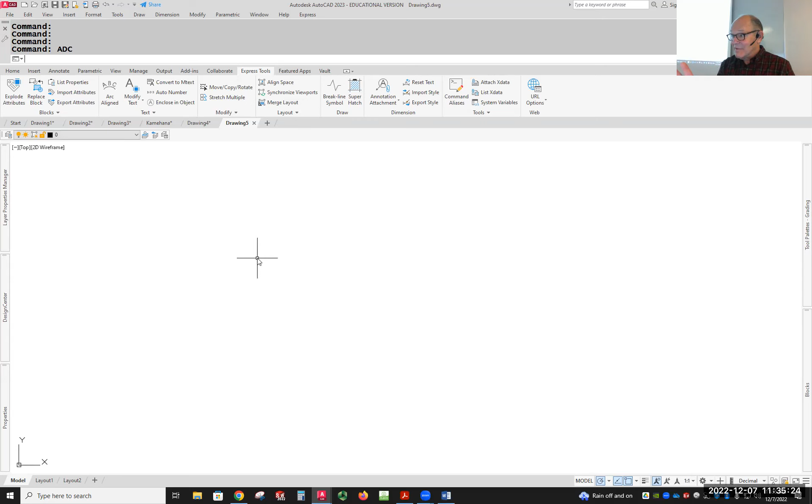Then I come back and say for hidden, it's going to be hidden 2. Now I start a new file, and the new file I start is going to be the ACAD ISO template. I go, wait a minute, I've already got layers. I'm going to go to AutoCAD Design Center, which I showed you in the very first class - remember that?

In my open drawings, the last drawing I created had layers in it - I can't remember what that was called now, but it's drawing 4. That had layers in it, and I'm going to just make those layers part of my drawing that I just started. This is a metric drawing, right? I bring the layers in, say yeah, that's fine, that'll work just great, and set that as the current layer.

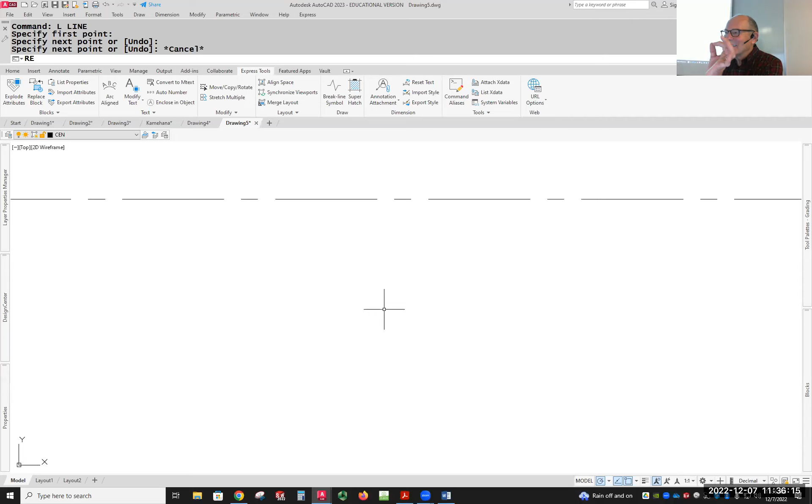I come over here and draw a line and go, yeah great, it's going to be a center line. Then I go, well, it's not a center line type - what's wrong with that? That's just weird. Then I zoom in and zoom in and realize it is a center line type, but the segments are tiny - see how little they are?

Well, because an 1/8 of a millimeter and a 1/16 of a millimeter is a really small distance, and that's what AutoCAD thinks it has. So even though you can bring the layer in, you still have to go and reload the line types.

Make sense? So to reload them, I go over here to layers, go back, go to load once again, and this time it's looking in the ACAD ISO, not the ACAD line type file. When I find the same name here, I've got to use the same name - Center 2, Hidden 2, pick OK, reload all selected, OK.

When I type regen, suddenly I can see those line types, because now they're based on millimeters and not based on inches. That makes sense? Now there are a few other things that are at issue.

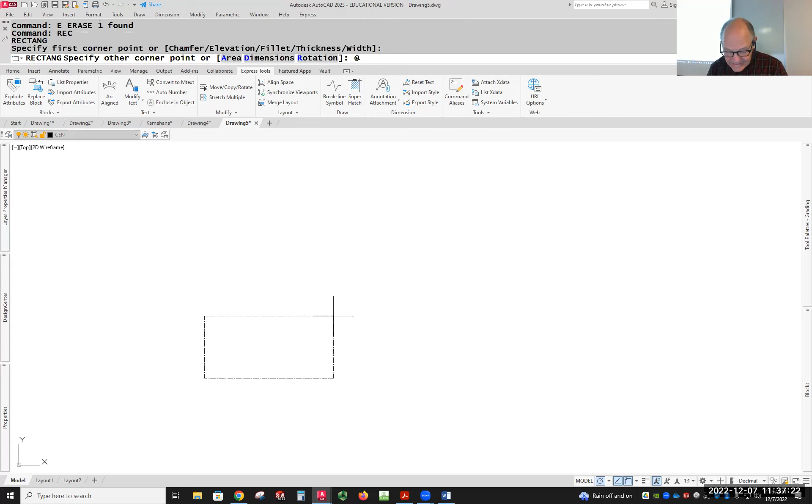Suppose I started this drawing thinking I was in inches, but it actually started with the template for millimeters. Whatever I draw here, we'll just draw something that's like 10 inches by 5 inches - so I draw something 10 inches by 5 inches.

You just came in from Zoom land.

So you must live fairly nearby then, right? Yeah. So I drew this thing.

It's small, but I go over to a layout and I say in the layout, I want to set up my page setup. I go over here to modify, and I do the monochrome. I come over here for our class, I'm going to do DWG to PDF. Now, if you're working someplace that has an actual plotter, physical plotter, it's going to be listed here.

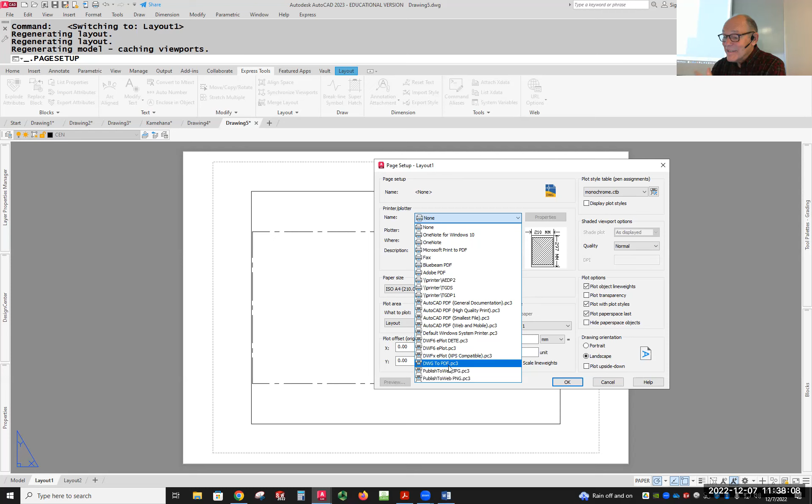In this case, we would pick one of them and it would go to a piece of paper. That paper could be as big as 4 feet by 3 feet, right? But because not everybody has that, I'm going to do that. And then I come over here and go, yeah, no, I don't want that paper size. I want the paper size I've always used. I want the ANSI full bleed A.

That's great. I come over here and pick that. And then I bring that out here and I go, I know for a fact I can plot this at a 1-to-1 scale. I come in here and I go over there and I say, let's do 1-to-1. And it looks like that.

It's because it thinks I'm drawing in metric. So it took that sheet of paper and it made it 25.4 times bigger. So right now, the scale it seems like it would work would be a scale like 10-to-1, but that's not a legitimate scale. I made this thing 10 inches. It should fit on a sheet of paper. So it should be 1-to-1.

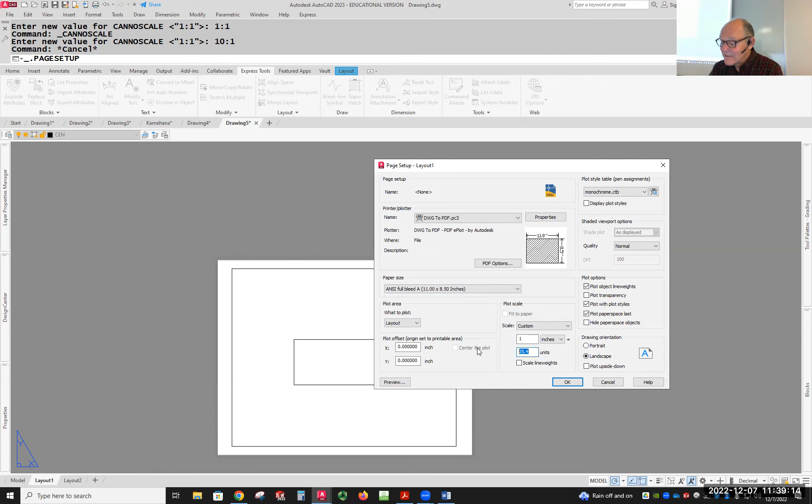So what do I do about that? I go over here to Page Setup Manager, modify, take a look and go, oh, wait a minute, look down here, 25.4. It automatically converted because I picked a sheet of paper measured in inches instead of a sheet of paper measured in millimeters. Change that to 1.

Now, boy, what's going on? I got a much smaller piece of paper now. Get rid of that. Come in here, put in another viewport. And by the way, the command for making a viewport is MVIEW, as in multi-view.

So you don't have to pick something off the layout tab here, which I could do by picking rectangle. I just type MV for multi-view. It comes in like that. Now, if I go and say I want that to be 1-to-1, if I make this big enough, 1-to-1 fits, and I know 1-to-1 makes sense.

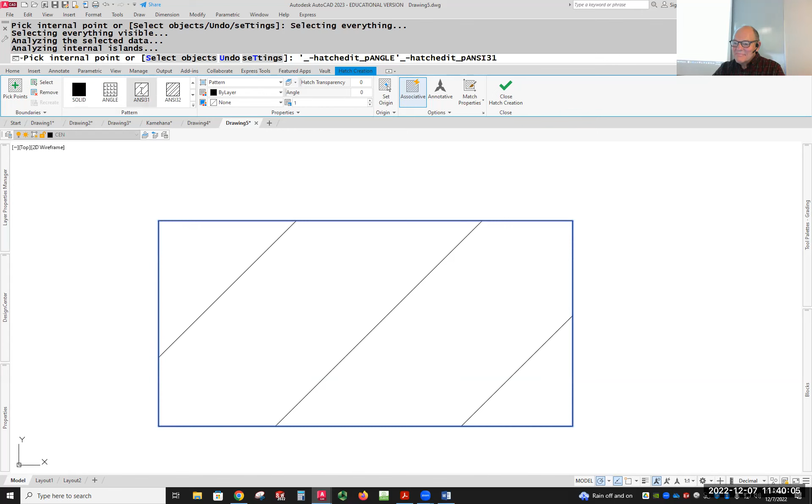Make sense? The other issue is if I put a hatch pattern in here, you notice it's a hatch pattern, ANSI 31, but it's like gigantic, right? Based on millimeters, not based on inches. So that hatch pattern, the only thing I can do about that is go back and start it again.

with this, with the ACAD DWT instead of the ACAD ISO, or come up here and say, I want to change the scale. Now the scale is 1. I want to change it to 1 divided by 25.4 is basically what I want to do. Now, can I type that in like this? Well, try it. It goes, no, you can't.

Well, could I just type in 0.04? Yes, you can type in 0.04. And once you type in 0.04, bingo, now it scales it. 0.04 is really close to 1 divided by 25.4. You divide that as 0.039 something. But for a hatch pattern, that now is close enough. So now your hatch pattern looks good.

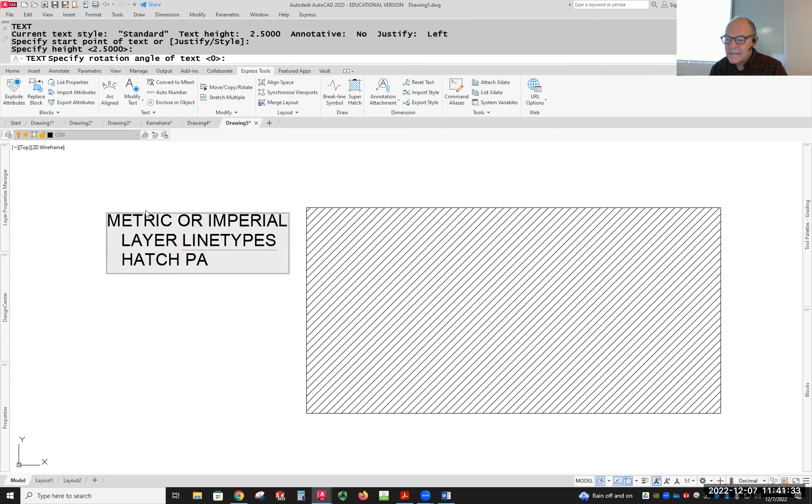So if you look at all the things that matter here, if you end up metric when you wanted to do imperial, the things that come up that matter: layer line types, hatch patterns, the units when you do the units command, page setup and primarily sheet size, and then the measurement variable.

All of those have to then be altered. You have 1, 2, 3, 4, 5 things that you've got to fix in order to make something into what you wanted if you start with the wrong template. Well, Luke's saying, yeah, you got to pick your units. You got to know when you start what it is you're going to do. It makes it a lot easier.

Now, I've never showed you this initially because I didn't want you fixing problems. I wanted you to start in them correctly. Start it correctly, those problems go away. But now you can see all the things you have to do.

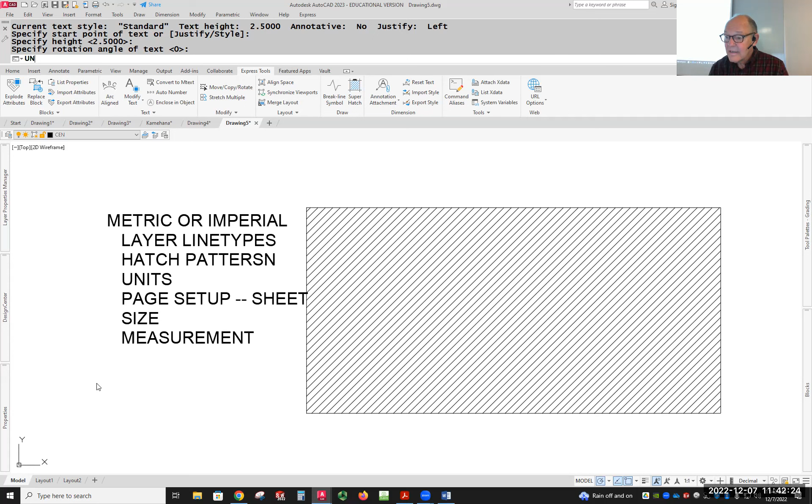Now, units, you know, I have to, oh, the units, they have to be set to inches now. All right, that makes sense. Measurement is a variable that determines whether or not you're in an inch drawing or a millimeter drawing. 1 stands for millimeters, 0 stands for inches. Change that when you first get started, and that will change a lot of things for you.

The other thing is your dimension style, but normally you can figure that out when you look at it. Right now the dim style is set to ISO, and the arrowhead size is 2.5. That's great for millimeters, but huge for inches, so you'd have to go back and change those things. You still have to make sure your dimension style is correct. You can't move a dimension style from a template drawn in inches into one drawn in millimeters without modifying it, because all the values will be wrong. Does this make sense to everyone?

All right, go back and see what else is going to come up.

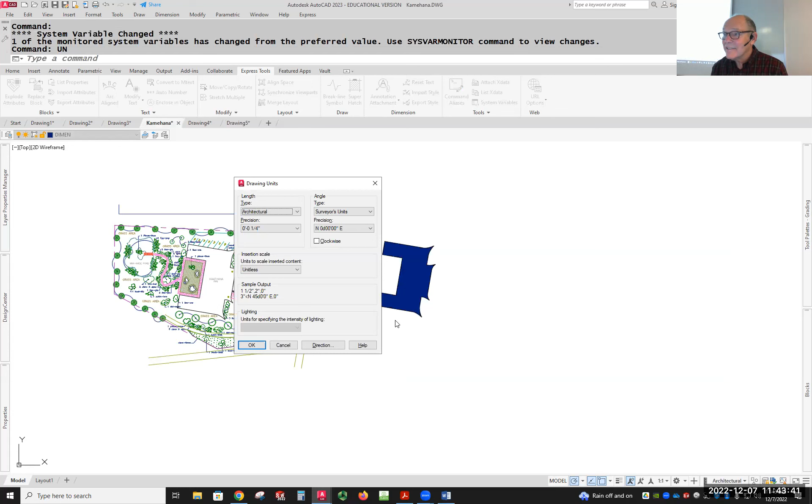How would I know if I open a drawing what units it is? I open this drawing right here. If I type units, it tells me architectural, that's inches, so I know that's imperial. If I look at the measurement variable, it's either going to be 0 or 1 - 0 means inches. I go over to the layout, right click, go to Page Setup Manager, modify, and set up a page. If I do the DWG to PDF and use a size, it doesn't change that to 1 to 25.4. Any one of those will tell me this drawing was done in inches - it's an imperial drawing, not millimeters. Make sense?

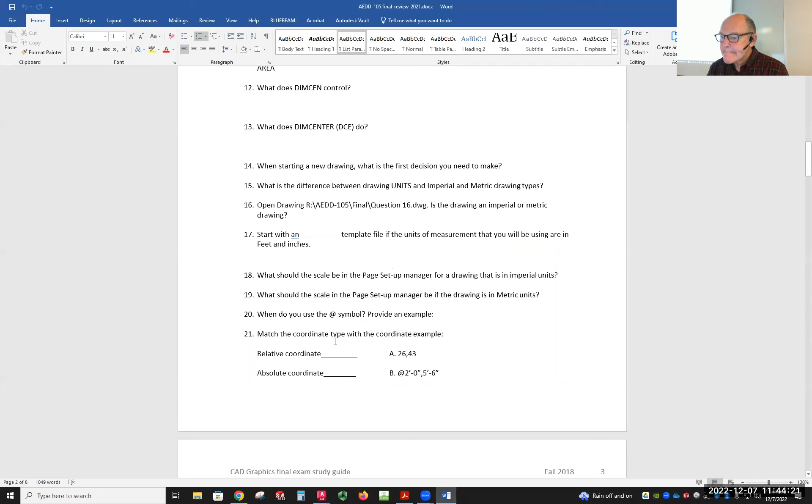This has to do with the scale for the sheet. So if I draw something, what I'm really asking is: what should the scale be in Page Setup Manager for a drawing with a sheet size of A size or other inches. In other words, when you have a sheet size measured in inches and you're in an imperial drawing, it's a 1-to-1 scale. If you come down here, do the same thing.

For a drawing with a sheet size of A size or other inches, in this case, because you're trying to put the drawing - even though it's a metric drawing - onto a sheet of paper measured in inches, it's 1 to 25.4. And 25.4 is the magic number - that's exactly how many millimeters there are in 1 inch. That's why it gets used all the time.

The @ symbol means last point entered - you can use that all the time. Down here you see absolute and relative coordinates. I'm giving you four examples here: which one is relative, which one's absolute, which one's polar, which one's relative polar? If you take a look, anything with an @ symbol is a relative coordinate entry - it's relative to the last point you entered. It doesn't start on the coordinate system with 0,0 in the lower left-hand corner.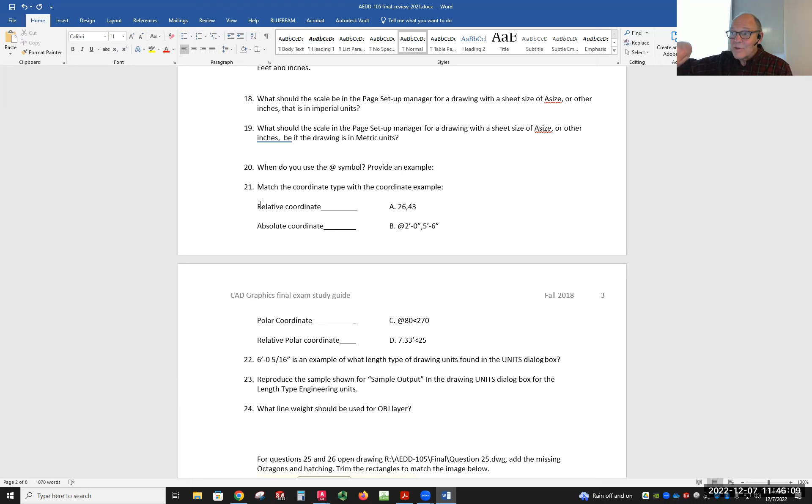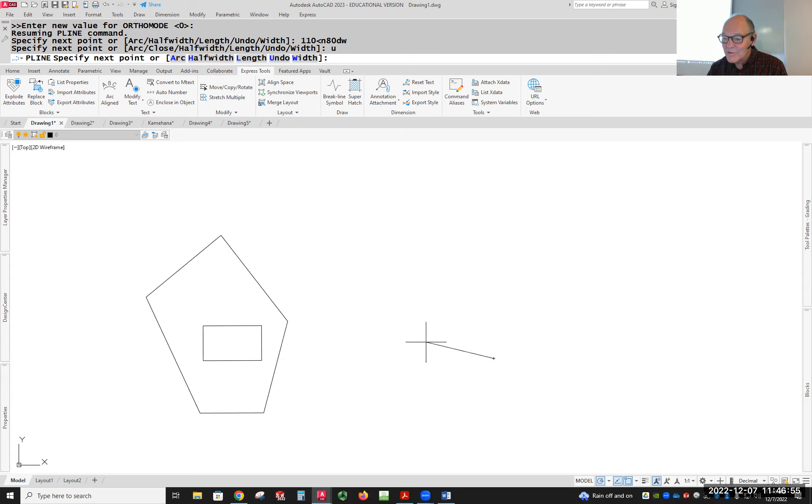So what that means is when we did this drawing, I started someplace, but then I needed the @ symbol for the next point because I wanted to indicate from that point how far it was and at what angle. If I didn't type the @ symbol and just typed 110 at an angle of, say, north 80 degrees west, where did that go? It went all the way over to this point, which from 0,0 is 110 at that angle. So the @ symbol just means don't start from 0,0 - this is not absolute - start from the last point that I entered.

Now, if I pick a point here and draw a circle and give it a size, if I press enter and it asks for the center, if I type just the @ symbol, it also means last point. That's how I can draw concentric circles - I can make that 20, I can make that 40. So the @ symbol means literally from the last point entered, and if you do it all by itself, it's just whatever the last point you picked was.

In fact, with an object snap, if I wanted to draw something 10 feet away from that point, I go to my circle command, shift right-click and say 'from' - it asks me to pick a point, then what's the offset from that point. Internally, it's making that the last point I entered. So if I say 10 at an angle of 0, it starts from 0 without the @ symbol. But if I do the same thing with the from object snap and type @10 at an angle of 0, now it moves over from the point that I picked. Make sense?

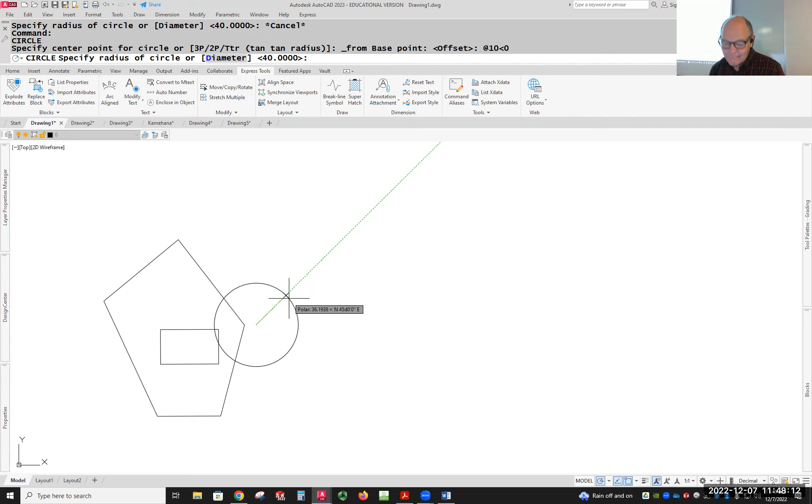Line weight, the line weight stuff, you know, for sure.

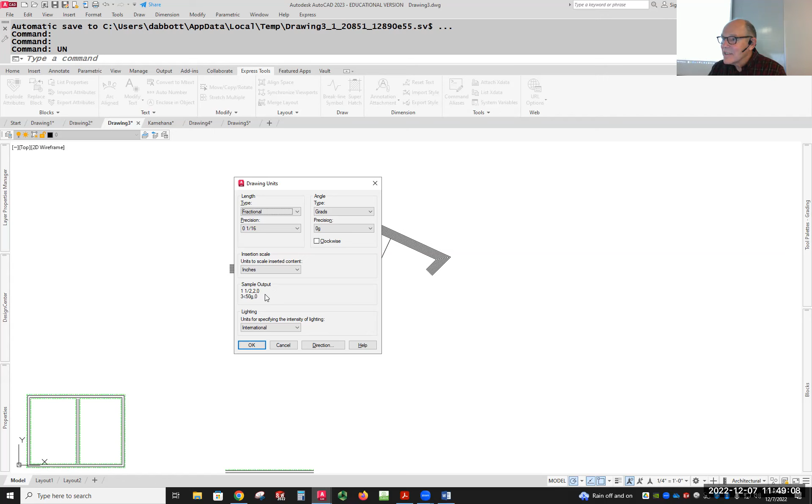When it says reproduce the sample shown for sample output, what that's saying is if you go into AutoCAD and type units, sample output is over here. So if you pick something like decimal degrees, the sample output shows right over here, see where it says sample output? So if I say I want to do this in grads, it'll give me an example of what it would look like. If I say I don't want architectural units, I want decimal. If I say I don't want decimal units, I want fractional. That shows me what the output would look like if I make those changes. That's what that question is asking.

This one, you ought to be able to trim stuff, that's all that is. Getting an area, you know what that is. The scale command, let me go over the scale command again.

We've done the scale command a couple of times, but people still have a little trouble with it sometimes. So let me pick a drawing here. Let's take this one. All right, so here's something right there. Suppose I want to scale that.

If I say I want you to scale that 120% of what it currently is, 120% equals 1.2 times. In other words, 120% of something means it's the same size it was plus an additional 20%. And how would I know? Well, how would I do that? I'd multiply by 1.2. I would not multiply by 120. 120 times bigger is not 120%.

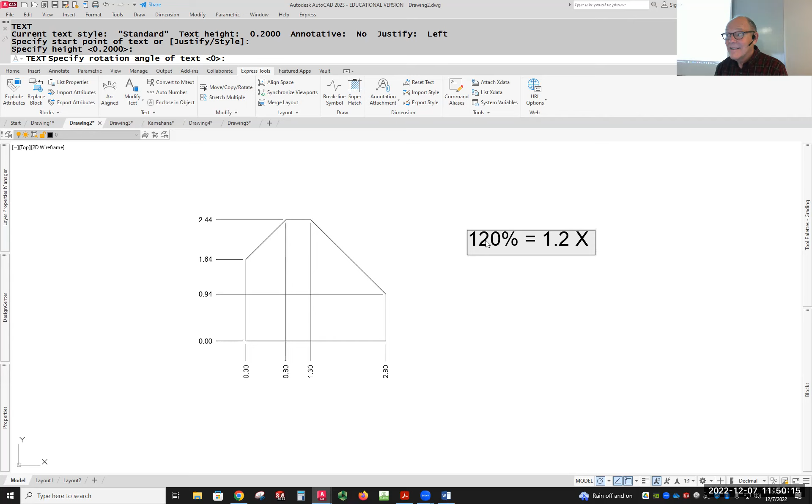It's 12,000%, right? So if I come over here and I say, I want you to scale that, I go and scale this whole thing. You have to pick a base point. If I now say I want you to scale that 1.2 times, you do that, it gets 20% bigger, all the dimensions change. But there's something else.

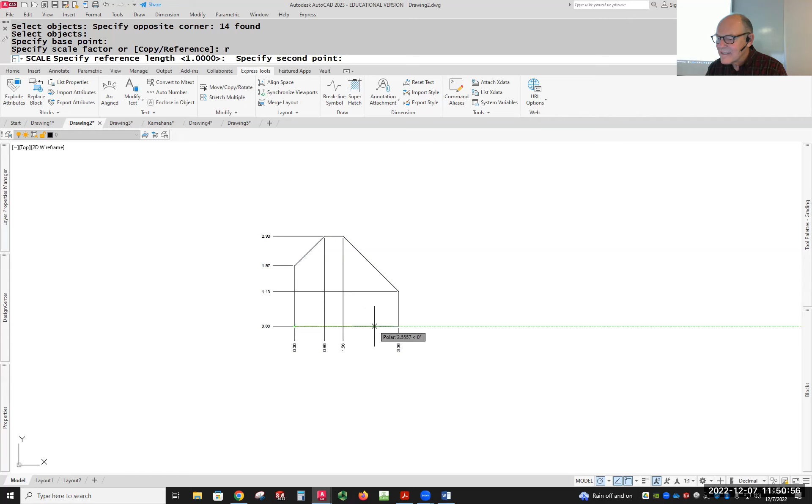Suppose I go, you know what, that number's wrong, I want the length of that to be 4. I go to scale, pick all my objects, and this is where understanding AutoCAD having options, you look up there and you've got copy and reference. I'm going to type R for reference. Reference length, so the reference length is the distance from here to here. I want it to be 4. Now it's 4. So I scaled something from a known value to the value I wanted.

Now, normally I don't really know what that value is. So picking the 2 points to let AutoCAD do the math is the most accurate way to do it. Because, as I said before, that says 3.36. However, if I increase the precision of that, and make the precision go up like this, that's exactly 3.36, but it might not be. It might be 3.6247 or whatever.

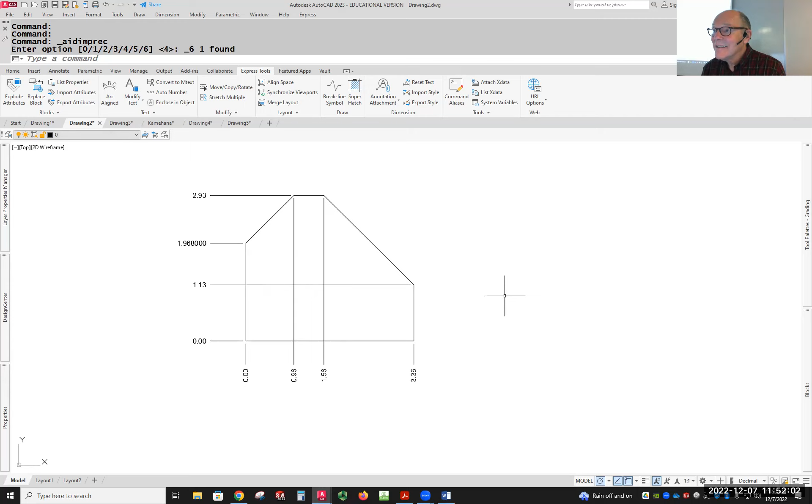So when I say I'm going to pick the 2 numbers and go to scale, pick my base point, reference, let's just do this one over here. Let's say I want that to be not 1.97, I want that to be 2. Now it's 2. Before I might have thought it was 1.97, but it's not, it's 1.968. So if I use 1.97 and did the math myself, I would be wrong. If I let AutoCAD determine it by picking the 2 points, it's going to be correct.

So far, so good. We've got 5 minutes. Let's see if there's anything else here.

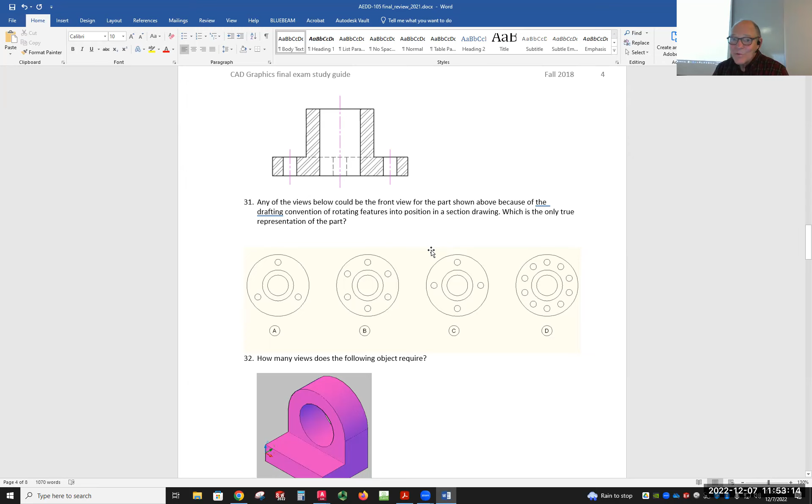How many views on this one? You can make a decision on that.

M line. What command was used to get the following information?

Okay, here's the thing you've got to do. The 3 island displays. Let's go to AutoCAD and figure that out. Let's say I want to do a hatch pattern. I go to hatch. It comes up here and I look, and I don't know. There's a lot of things up here, but I don't see anything about islands. I do have an options thing here though.

Outer island detection. That sounds like maybe what I'm after. I go here, I've got normal, outer, ignore. If I say normal and pick this, it does that.

By the way, join will allow me to put together into one polyline a bunch of lines that are connected to each other.

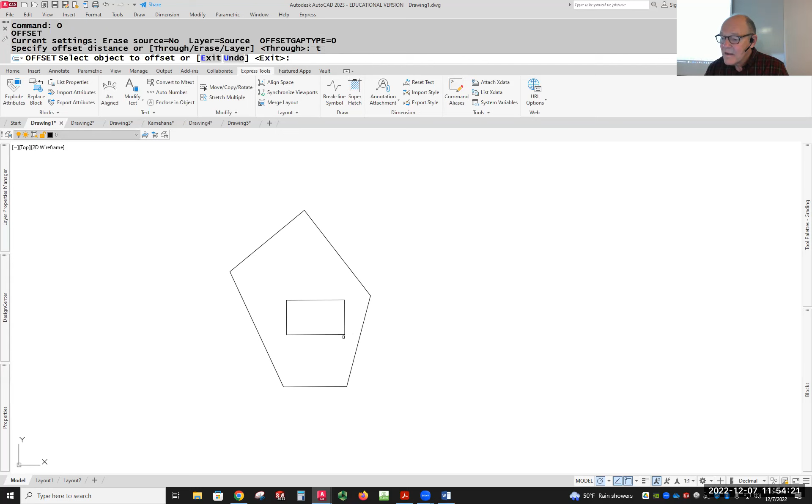So if you go to the hatch command and look around, anything that has a little arrow on it is going to have a drop down, and under options it's going to give you some options. So outer hatch detection - if you look at this, the normal island detection looks like this. That's how it would hatch.

If you look under options and say ignore island detection, now it goes right over anything that's in the middle. Make sense?

And then the last one would be the one most likely to be what you want, which is outer island detection, where it would look like that. So you have a choice when putting a hatch in for what happens to the parts that are inside. That's what it means. But again, you can answer any of these questions by opening AutoCAD and taking a look at what the options are when you get in there.

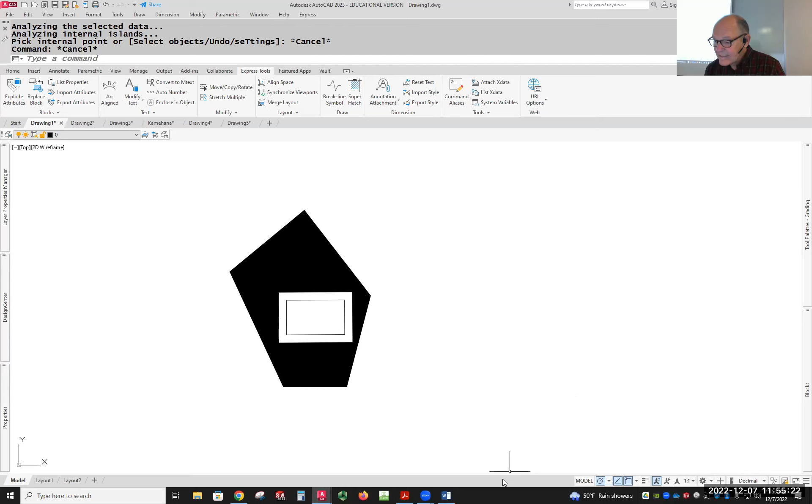You can draw that, I know, and you can plot stuff. Everybody here, everybody in the class, everybody all of you have been doing drawings, setting up layouts, the whole thing. There's no problem with you doing that. I can't imagine you need any help with that one. And then these are things that if you've forgotten - this one you should know.

There's 25.4 millimeters in an inch. That's just one of those things where if you work in a technical field, you should just know that, because that's one of the things you're going to have to do periodically.

But then A size paper, we covered that. B size paper, we covered that. You don't remember? Look it up. You've got a technical graphics standards available to you. Line weights - again, there's all kinds of handouts that I gave you that cover these kinds of things. Text height, those are all things you should know. And if you don't remember, you can look up. The spacing we covered.

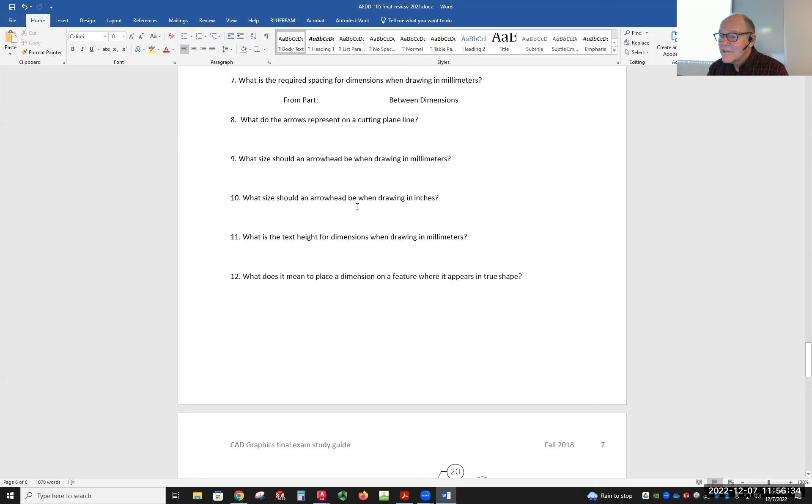What do the arrows mean on a cutting plane line? Arrowhead size should be the same as text height. So when they ask for arrowhead size in millimeters, it should be 2.5 to 3. And with inches, it should be 0.1 to 0.12. So whatever your text height is, that's what the arrowhead size should be.

This one, you just have to identify line types, and I think you can do that easily. And again, if you've forgotten, you can go and look it up.

Here, creating this shape - that right there would be created with a circle, tangent, radius command, not with a fillet command. It wouldn't work. If it was inside, it'd be the fillet command. This one Sarah asked about earlier.

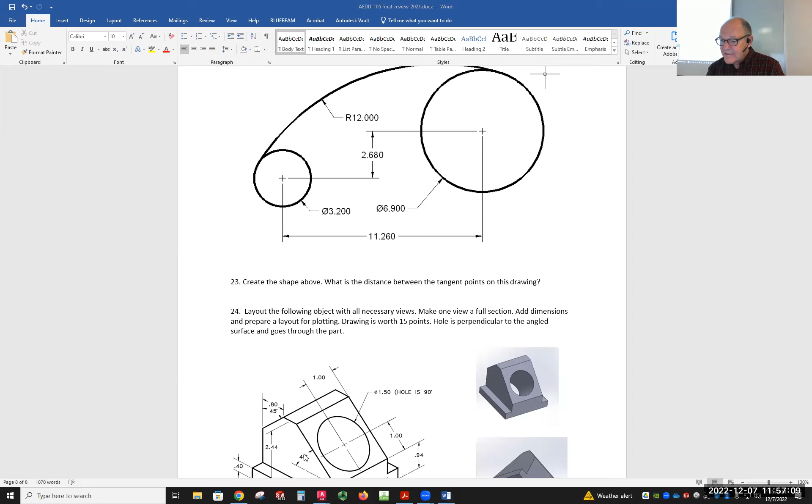And when you do that, it says create the shape. If I created this shape with a circle here and a circle here, and now I use the circle tangent, radius - one of the options is to make it tangent to this, tangent to that, and then give it whatever radius you want - it's going to do that.

Now, you will not get this exam, and you might actually get some of the same questions. Most of them will be different questions, but you might get some of the same questions. But this is the kind of stuff I'm going to be checking to see if you know what to do.

When you draw something that has hidden features, did you use hidden lines? Did you set up your layers? Do you have layers that are hidden? And again, if you made a template and that template has everything you need, because you're gonna have to put dimensions as well, use your template. In other words, be smart when you do this.

I'm not gonna open it till next week. I will be here next week. And if you wanna come in while I'm here to take the exam, then you're welcome to do that. I'm just gonna be sitting in the room with the Zoom and be open.

That way, if you don't understand what I'm asking for in this question, if there's a question of the wording - not everybody in my classes grew up speaking English, and that means sometimes I say something that doesn't make sense, right? Ernest is saying yes, it happens all the time. So I don't want you answering a question incorrectly because you don't understand what I'm asking, which is why I want to be available for anything that you're confused by.

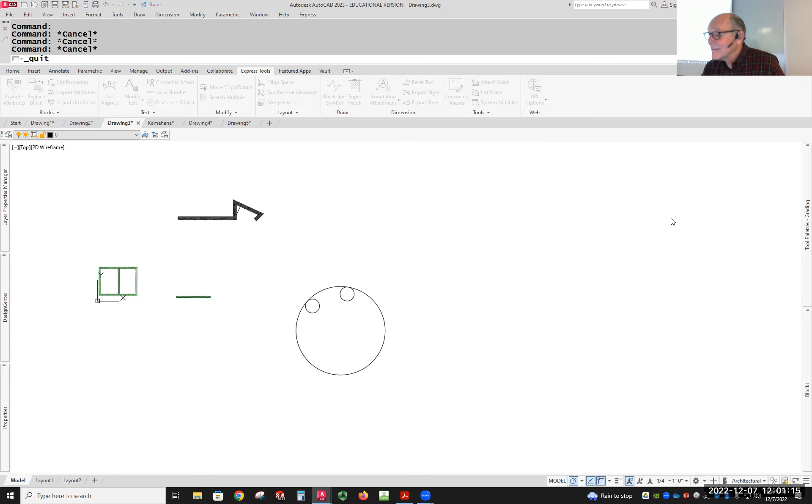Okay, I gotta run because I gotta get in there and get on that call. Because this class is so interesting, I have either been late for or missed every department meeting so far this semester. I get in there late or I forget it altogether because we're talking in here about something else. And we have a really important meeting right now, and I don't want my colleagues to think I don't consider them as important as you, but I don't. Don't tell them. Just don't. Say what?